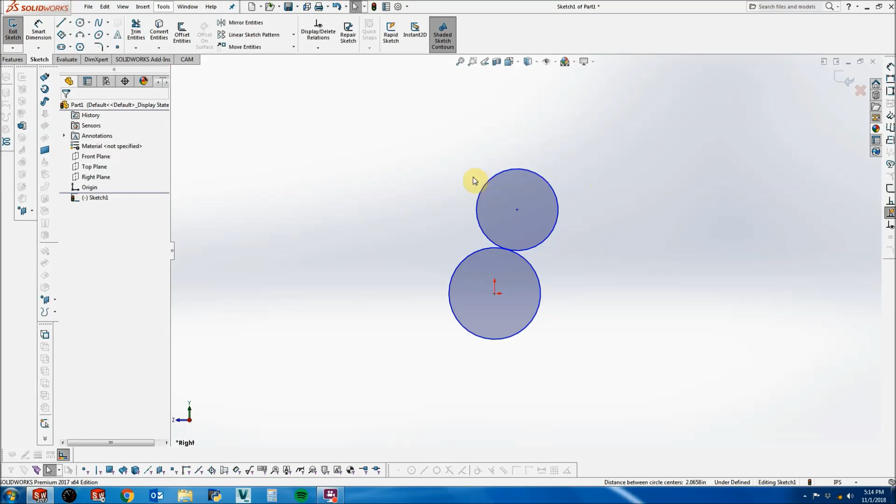Then we're going to have another gear going up against that gear, and to get a reasonable gearbox speed, it's probably going to end up being a 2-speed gearbox. So we'll put another set of gears on there. So this is our output, this is our intermediate, and then this will be the motor.

A typical CIM pinion is 12 teeth and 20 dp. So we'll let this represent the pitch diameter. For a 12 tooth, 20 dp gear, the pitch diameter is going to be 12 divided by 20.

And we'll say this is, let's just say 60 teeth for now. We'll probably end up adjusting stuff. Maybe let's do, I'm entering equations right into SolidWorks, and let's put like 30.

Okay, we want to calculate the gear ratio. Let's just get that right from the start, and let's say we're also using a 4-inch wheel here.

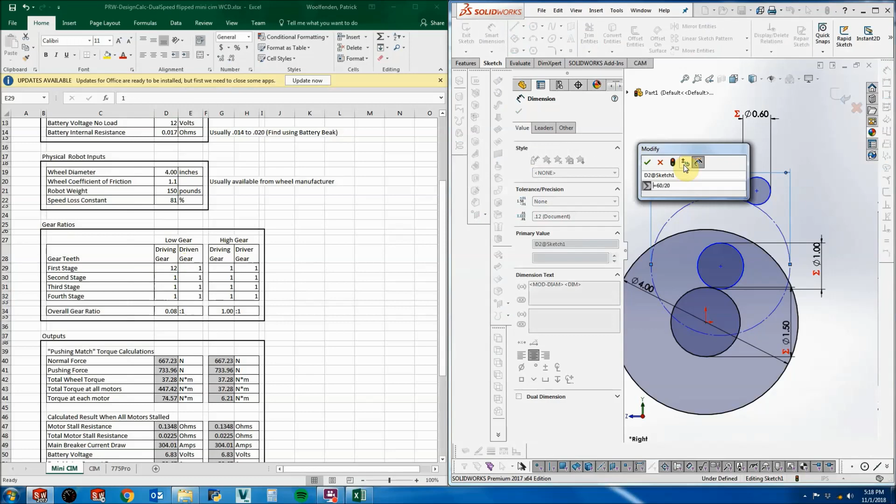Okay, so our driven gear is, let's see. So we said the first one was a 12 tooth, this is 60. I'm going to put these over here in the high gear. This spreadsheet is designed so it can be used for a dual speed gearbox, but you can also use it for a single speed gearbox, just to see multiple ratios that would fit.

So let's try to design it for 14 feet per second. Here we're at 13.59, which is pretty close to 14. Let's say 14 is the max speed we want out of this gearbox, but we also want it to be adjustable down to lower speeds. Okay, so we're kind of close.

I'm just going to do this for consistency purposes. Okay, let's figure out how we're going to put this. We'll let this represent the diameter of the CIM motor.

I want to make this gearbox as compact as possible, so I want the CIMs to actually be overlapping the wheel, kind of on the outside of the robot. So this circle is representing the wheel, this is representing the CIM.

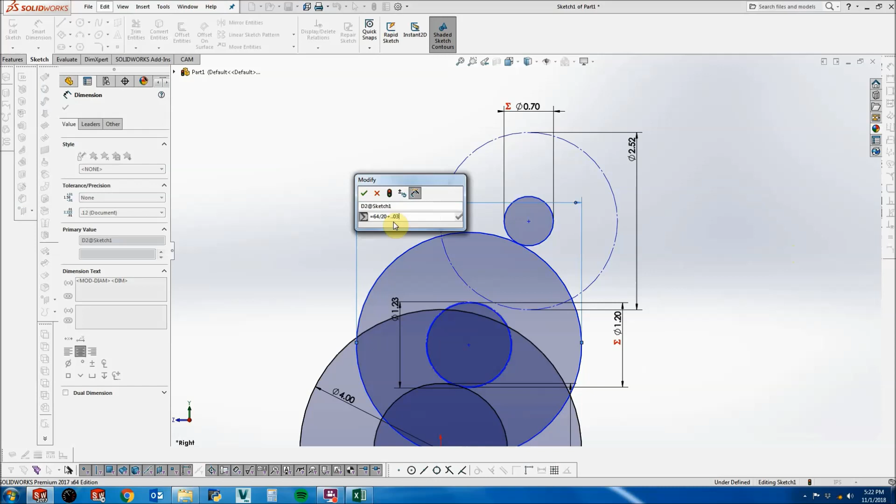Oops, that's not the right one.

So everything's looking reasonable so far, but we're going to have 3 motors per side. It's the same size. Let's say we want these to be the same distance apart, just mostly for aesthetics.

Okay, so now we need to connect these other 2 motors into our gearbox. We're for sure going to need the same size pinion.

Okay, so if that's not nice, let's go like this. That could kind of work. Let's see.

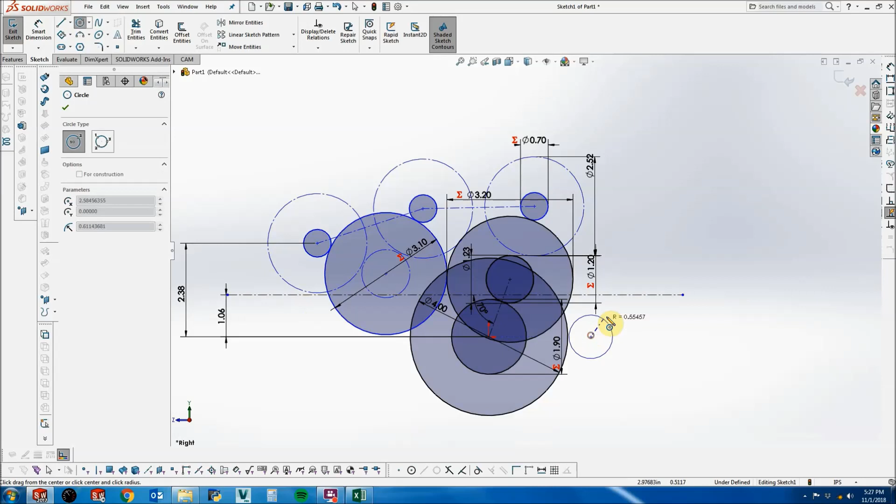So let's figure out where some of these, like the spacers, will go. I'm just sort of sticking them somewhere for now. We'll do like 1/2-inch spacers.

So these bolts are going to go all the way through the frame rail, or one side of the frame rail. Let's do it this way. Seems reasonable.

Okay, so these spacers - so these big gears are essentially outside of the plates of the gearbox, but they're like in towards the middle of the robot. I'll just leave those there for now.

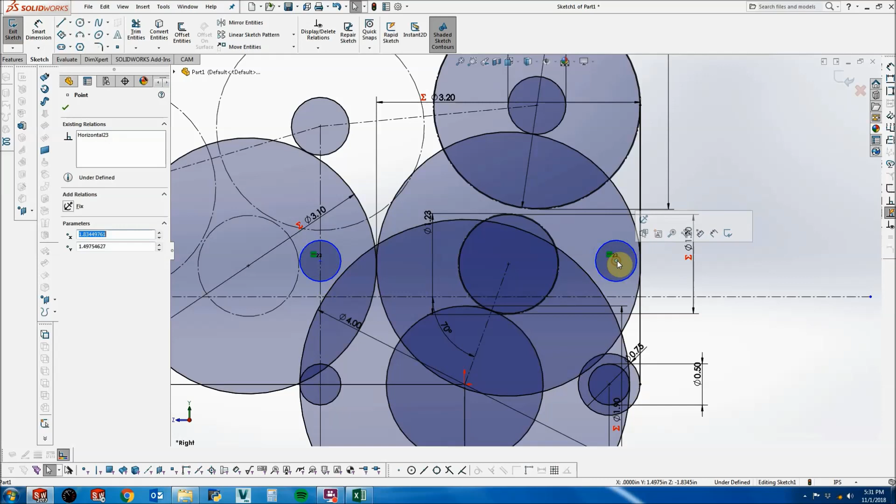Let's make these the same height, just seems like a good thing to do. Let's say, so this is a 1/2 inch spacer. Let's say we want a little bit of clearance around beside it on the edge of our plate.

Then we just need to constrain... I guess let's make these - we just need to sort of pick something to reference them on, so just do that.

Okay, this is decent. I think we'll be happy with that.

So this sketch is just like the layout of where the gears and the motors and stuff are going to be. So I'm not actually going to use this sketch directly, I'm just going to sort of hang out here. So then we'll do another sketch, and this will be our motor plate, the bigger one that gets all the motors and everything mounted.

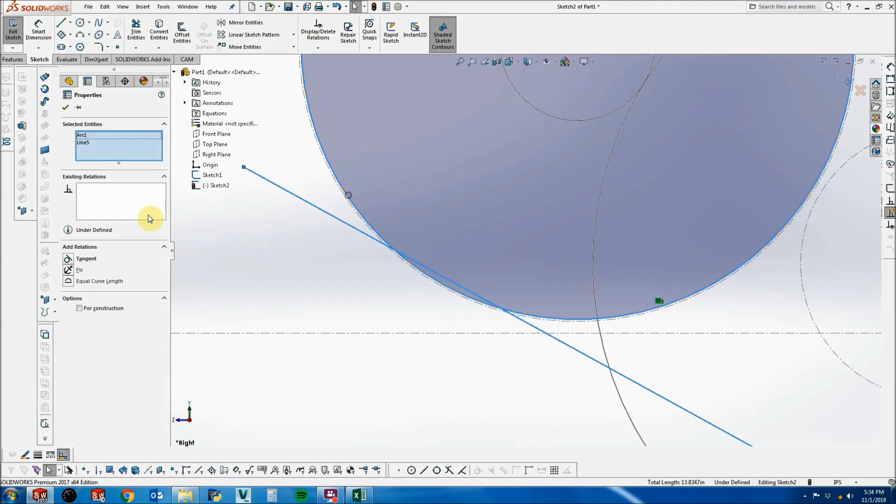Okay, so let's say we want this to be symmetric, just so the bottom of the gearbox kind of looks symmetric. And then, okay. So we'll... this kind of has defined the radius of this circle, but that looks fine.

Okay, so that'll be the outline of our gearbox. So let's make all the holes in it also. So we're gonna have our bearings here. These are all gonna be 1 1/8.

And the holes for our CIM motors up here. Jeez. So these are 0.75 plus a little bit of clearance. And then these - I think these will all be tap drills for 10-32.

Let's put in the holes for our motor mounting screws also. So these lines are just going to help me position those holes. These are all equal to each other. This is 2 inch. These are 10-32s.

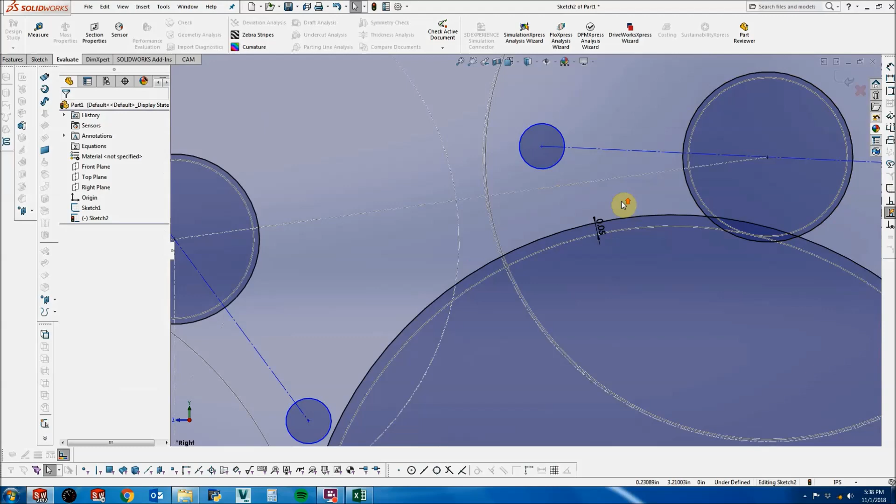And it's less for 20 DP gears. The difference is roughly 50 thou on the radius. So we can just rough that in order to make sure that our screws are not going to be... those are just the clearance holes for the screws. So the actual head, if we use like 10-32 buttons, it's like about 0.36.

That's a tiny bit close. So I'm thinking that once we lighten out this gearbox, we'll probably want a webbing piece between those two. So I'm trying to position that on there. I don't think there's much hope we're going to get this screw between these two gears.

Let's just put this... let's just put that vertical. This one, let's just put it somewhere. Seems reasonable. I don't want these screws to end up randomly in the middle somewhere - I kind of want these screws to end up close to these lines, because when we're lightening it out, it'll just make it a little nicer.

And if they're here, they're also not going to be covered by this gear. There's not really too much hope for this one, so if the middle motor needs to be swapped out, we'll have to remove this gear, but it's okay. Just constrain this guy. So we're going to remove the second motor here, because the screw is not going to fit in. The screw will fit under the gear, it just won't be accessible.

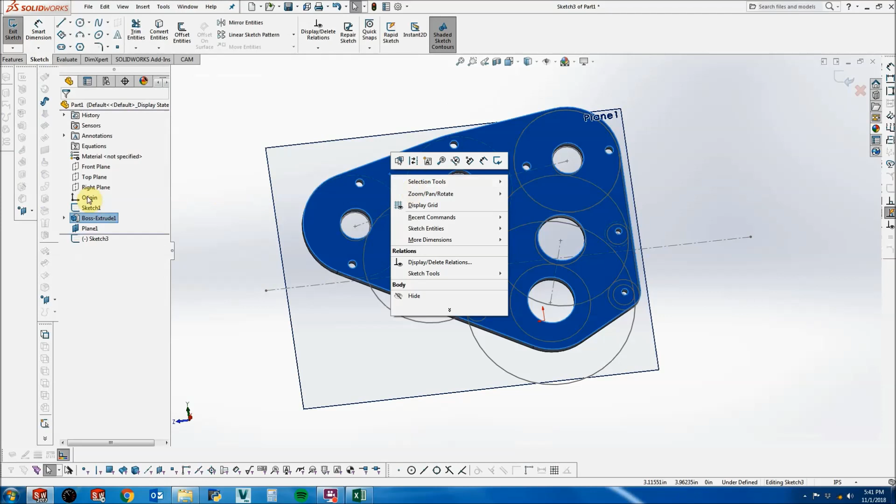So I'm going to space it out a bit. I'm going to sketch on this plane - this is where our second plate's going to be. And then, okay, yeah, so we'll hide this plate for starters, just so we're only seeing our layout sketch, which will end up converting a bunch of entities. Let's look at it all from this direction.

So we're gonna have those gears here, or not gears, bearings. So this is bearing for 1/2 inch hex shaft. These bearings, okay, so I can already tell that we're not going to be able to use the same bearings here, because the motors are going to be going over this plate, and that's the outer diameter of the bearing, so there's not much space left for actual material of the plate to hold the bearing.

So let's make these guys, they're going to have to be smaller outer diameter bearings. So we'll go for like 1/2 inch, or I think we'll use 3/8 hex bearings or something. Sure, 7/8 OD.

Okay, and then we want our webbing material to be 3/16. So 7/8 plus, let's just dimension that directly. 3 divided by 16.

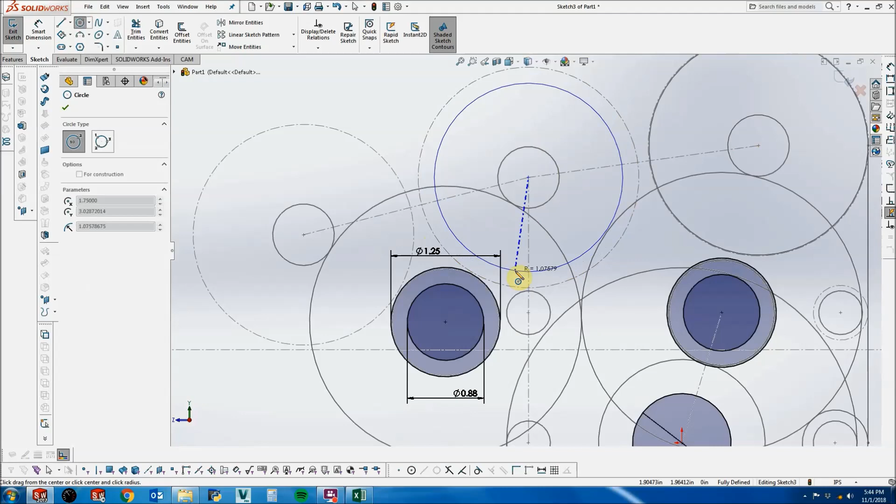It's going to be the same. So this plate needs to avoid this motor here, so we can't just do a straight tangent line between those two bearings. So we'll do that, that's a little bit of clearance, and then we can connect these. Nice.

And then this plate is tying into our spacers. Whoops, not that one, okay. So I am going to show the other plate, or maybe I'll show the sketch for it, so we'll get some things from here too. That's all we needed.

Keep clicking the wrong button instead of the escape button. Nope, one more line up here. Okay.

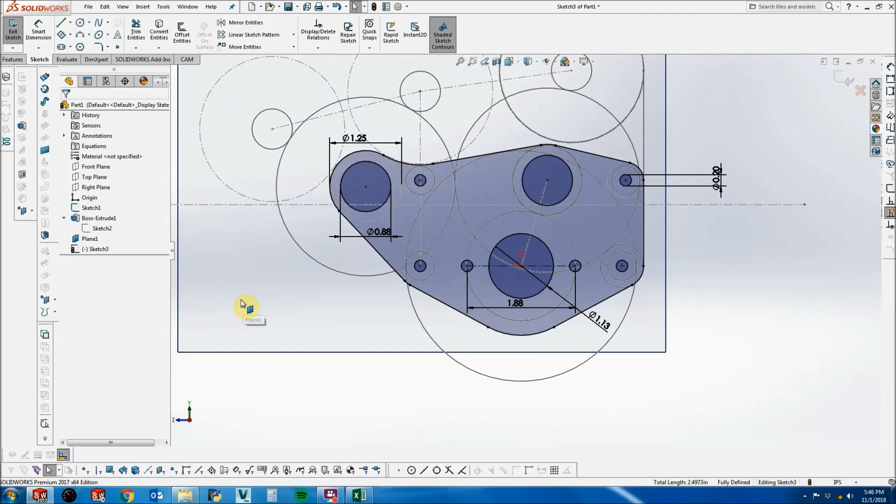Okay, I guess we'll just do this. Construction line, oops, almost. Midpoint. These are also 10-32 clearance. This one's ready to go.

Quarter-inch plate. Okay, so these are our two plates, and we'll lighten them up and make them look awesome later.

But before we do that, we want to be completely sure that the plates are the shape we want, because that stuff's real. Lightening them out is super tedious, and if you're changing them a bunch after you do that, it gets really annoying, because it's more sensitive to broken sketches and stuff.

So we're just going to save this as, let's do flipped mini CIM gearbox plates, and this is going to be our master part.

So now, okay, so we don't want to put this straight in our assembly. This is one part file, but it's actually kind of like two parts. So we're going to do this thing in Solidworks where we can actually save bodies.

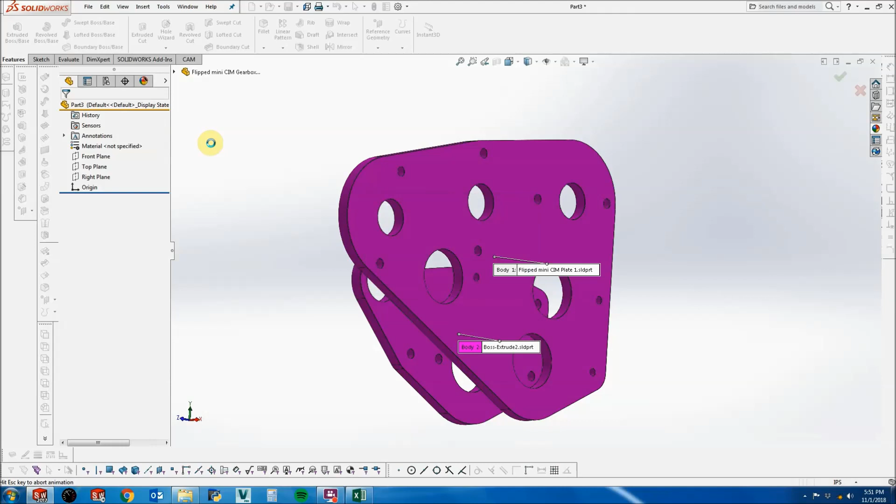Okay, so that's really, so what I just did, so we saved out these two bodies into new parts. So they're gonna like, okay, so this is really cool because these parts are referencing the master part I made. So these parts will be the actual parts that we'll use in our gearbox assembly. But if you go back and modify the master part, these parts will actually update, which is super cool.

So like if I were to, let's just do a quick modification.

Okay, this is sort of just for demonstration purposes. So this is where I save the bodies. If I move that up above where I save the bodies, and then we look at the plate, that's the little one, now it has this. So it did update, which is super cool. Let's get rid of that because we don't want that.

Okay, let's work on our assembly now. New assembly, we'll start by just putting these plates in. Let's get the other one too. Okay, jeez, why is that still there? Just need to save that. There we go, just had to rebuild.

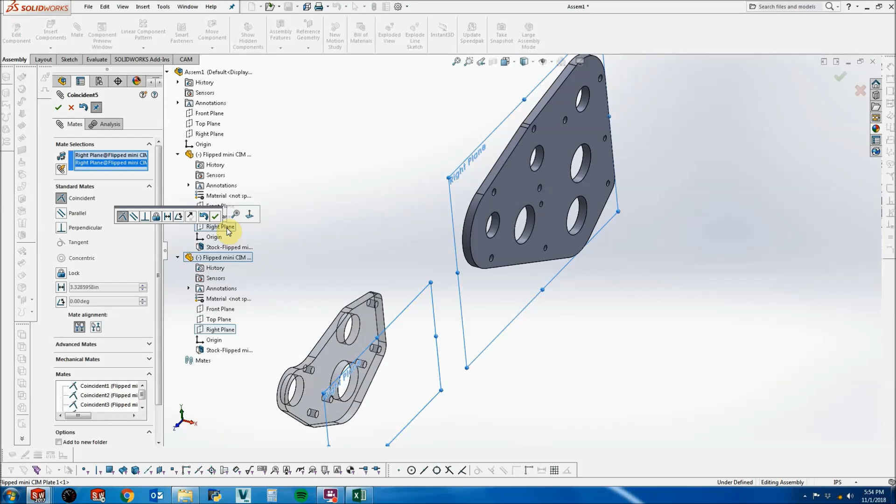So we know we want these two plates the same spacing relative to where they were in the master part, so we can just constrain these together. These are the datum planes for the parts. I'm pretty sure one thing isn't, is that everything? Okay, it looks like we're good actually. Okay, let's save this.

Okay, so let's put some stuff in here. Let's get our motors. Okay, let's... so we're just mating our motors in our assembly. We want that. Okay, let's put the wires near the top. So we'll get these holes here. Then we want our other two motors.

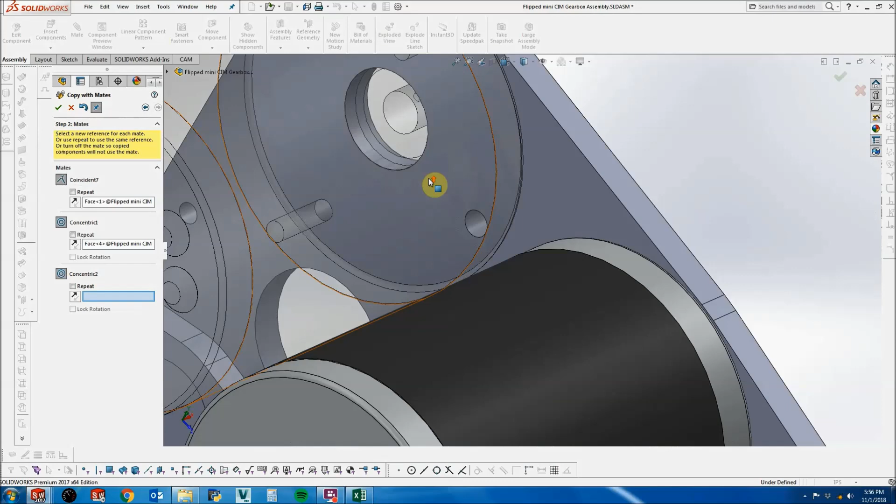Okay, coincident to that, concentric to this. Let's get that. Another one. And we'll do this one, so our wires are mostly at the top. Sweet. Okay, let's get some bearings.

I'm gonna use that copy with mates thing again. So these are our 3/8 inch Thunder Hex bearings. And then now we want our 1/2 inch bearings. Actually, let's wait to do those. Let's do the gears next.

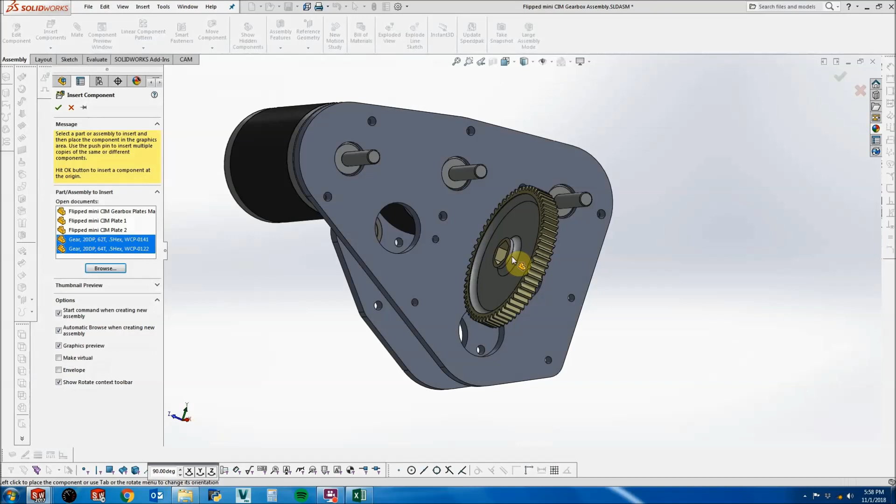Okay, what size? So we said we had this one 62, this one 64, I think. Gears. And we'll use these, we'll use the West Coast Products ones, because they're nice and lightened.

Have you been spacing like the distance between the plates? Okay, so the distance between the plates was set in the master part, and then we just constrained, or mated the datum planes of the plates together. So the master part, did you just add up the widths of the gears, or? I sort of made an educated guess on what I think it would want to be, and then once we stick everything in there, we'll see how close we were and adjust as needed. Right, yes, you can definitely adjust it.

Oh, so it's like a rough sketch and your idea of how far you think it's gonna be apart, and then we can adjust. Yeah, because that's not something we're gonna lay out in our layout sketch, because it's kind of in a different direction. Okay, our 64 tooth we said is here.

This one's the 62. Sweet, and we'll just do that for now, make them. It's about where those are gonna go. They look like they're meshing correctly. They moved again, okay.

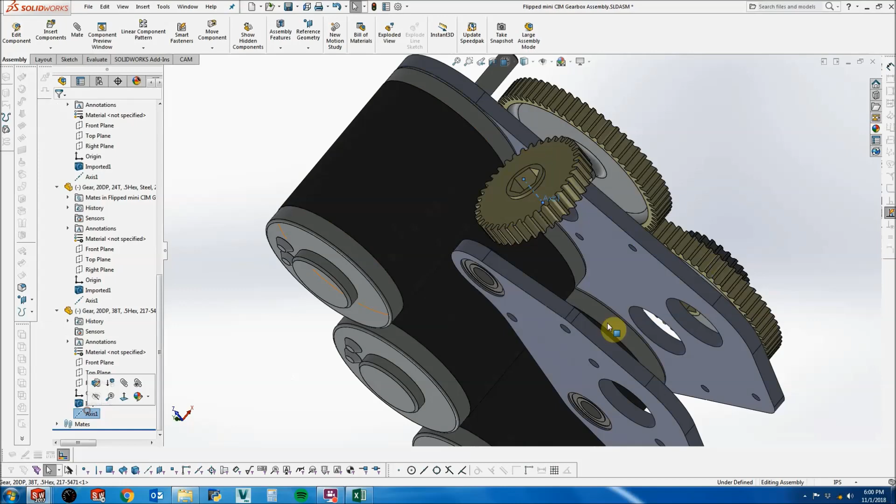I like to put axes on these gears so they're easy to mate to stuff. How do you make the gears mesh together? Does it just do that for you? No, there are ways to make it do that, but I honestly don't usually bother making it look like they're meshing perfectly. You definitely want your center to center distance to be correct, but I don't really bother making my gears look like they're meshing or making my hex shaft holes line up all together on the same shaft and stuff like that.

As long as the distance is correct you still have to do that? Yeah, I mean you're not going to be able to tell if the distance is exactly right by looking at how they're meshing. You're going to want to do the calculation to get the distance right. So is the diameter measured from like the part of the teeth? So the pitch diameter is kind of like sort of through the middle of the teeth. Oh, I meant the overall diameter. Does it count teeth?

Yeah, it does. Okay, and so then if it's 2 gears, if there's 2 gears, the overall diameter is like intersecting each other, like a Venn diagram or something. But the pitch diameter is for like tangent, and that's what you use to space the gears.

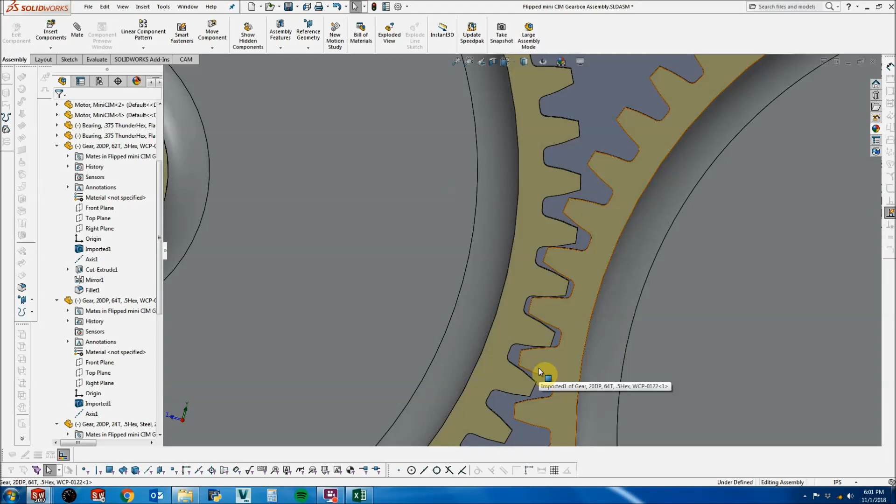So in the layout you created just a circle without any gear? Yeah, you just made them tangent to each other, so that's the pitch diameter. And the pitch diameter is calculated by the teeth divided by the diametrical pitch, which is 20 for these gears. So the actual thing looked like a Venn diagram, like you said, like the outer part. We'll just do it for fun.

So the outer dimensions of these gears are going to, let's see if this works. So they're intersecting, right? Yeah, but the pitch diameters - this one is 64 divided by 20, this one is 62 divided by 20. I got that wrong. Okay, so these are basically tangent. The reason why they're not tangent is because we added that extra 3 thousandths to make them not too tight. So there it is.

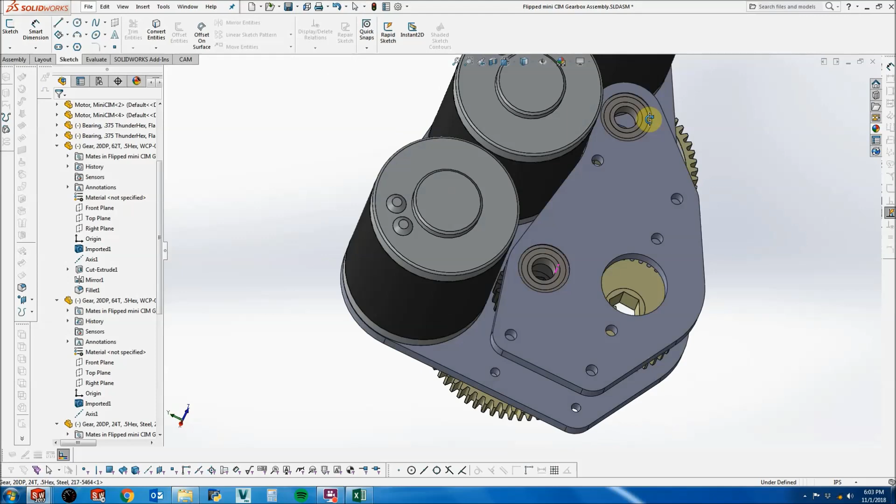Okay, we don't want to keep that sketch. So we got these guys in, and since we double checked, that's clearing. That's good.

Okay, so this is looking pretty nice. So there will be a shaft that goes through there and supports that. So I'm sort of trying to think ahead, like how are these shafts and gears and stuff gonna stay on and be captured? Yeah, John?

What you could do is tap into the end of the Thunder Hex and then put a bolt with a washer on the end to keep the gears on. Yeah, I think we'll do that for these gears, because that's easier for us than trying to use retaining rings or clips or something.

But then, so that'll keep the gear from falling off, but the shaft also needs to be able to stay, to not like - what keeps the shaft from going out of the gearbox? So...

Okay, I think I know what I'm gonna do, but let's put in the other bearings now. And let's use - I'm gonna use 1/2 inch Thunder Hex bearings actually, instead of the normal hex bearings.

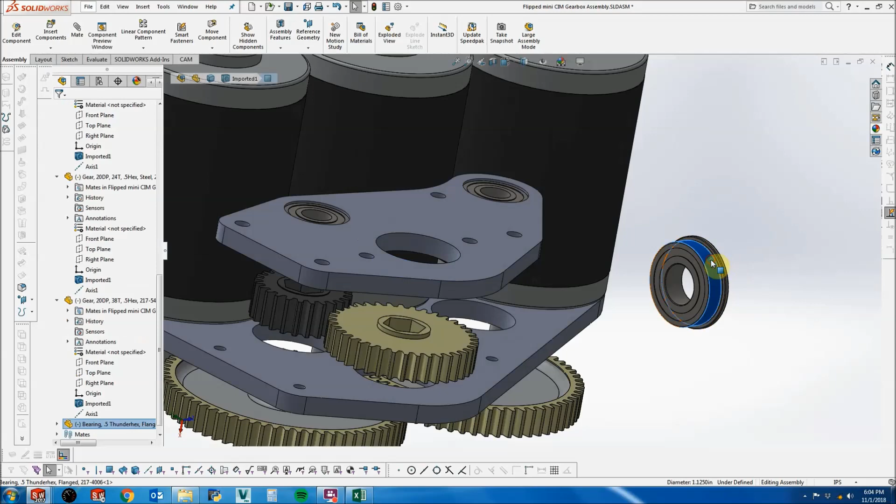Oh okay, jeez. I'm gonna - let's see. No, we don't actually want a bearing in that hole. Actually, I don't want that either. I want this to point the other way. Okay.

Yeah, we'll go like that. And since we checked, they're not touching. We already knew that was going to happen because we made sure in our layout sketch. I keep doing that, but I like to do this actually - copy with mates. Yes, it's a little bit faster. Okay.

So these shafts - just yet, because let's make sure that we have the spacing of these plates correct before we do the shafts, because that's going to be important for the shafts.

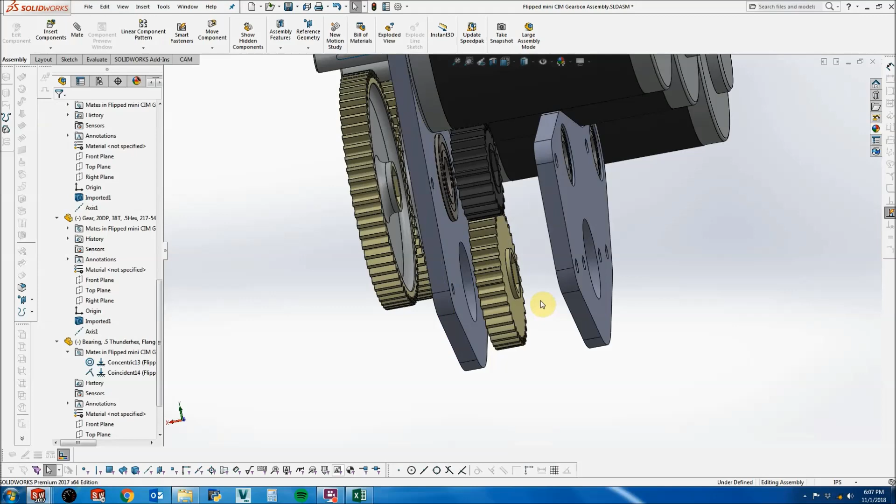Patrick? Yeah, you know the bearings, the holes that you put the bearings in - you put a little bit of space between the bearings and the holes, or is it just perfectly tangent so it fits perfectly? So I've just modeled them the exact size. You could do, as long as it's pretty close, it can't be too much undersized. If it's more than half a thou undersized, they're going to be really hard to get in, and they'll actually get squeezed and won't work very well. But then you don't want them to be too loose either.

So what's the clearance you use on them? If you want it to just slide in easily, it'll be maybe 1/1000th of an inch, but not be sloppy. But really, you're gonna have to dial it in with however you're manufacturing the parts.

Okay, so this section here - our frame rail is gonna go here. Our 2 sprockets for our West Coast drive chain are going to go there. So let's put those guys in.

We'll use these VEXpro 18-tooth sprockets. Yeah, let's mate these together. Let me do it this way. Oops, that's not the right button.

Yeah, John. Why not use a double tooth sprocket, like one that essentially is just one part but two sprockets? Because I want to use 25 sprocket - they just don't make them for 25, I don't think Vexpro does. If you were using number 35 chain, would you? Yeah, probably, I think so. If it fits better, I would.

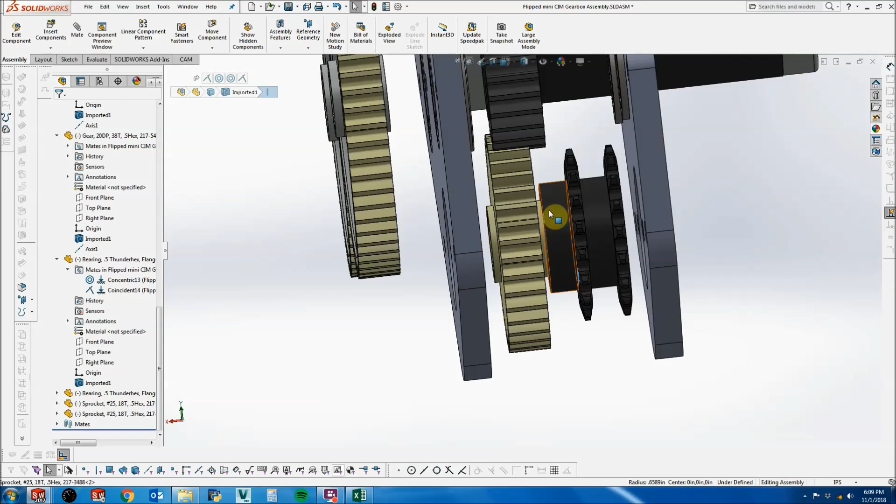Okay, so that's actually looking reasonable. Looks like we got that spacing on our plates pretty close.

Let's put in these bottom bearings. We'll use Thunder Hex bearings again. Flip that - I want the flange on the other side. Okay, let's put in that West Coast Products thing.

So this part goes through the 2x1, and then you can put a bearing in here, and it holds this bearing nice and out close to the wheel. And it's like a COTS part.

We just want to use as few custom parts as possible, so that it's easier for us to make it.

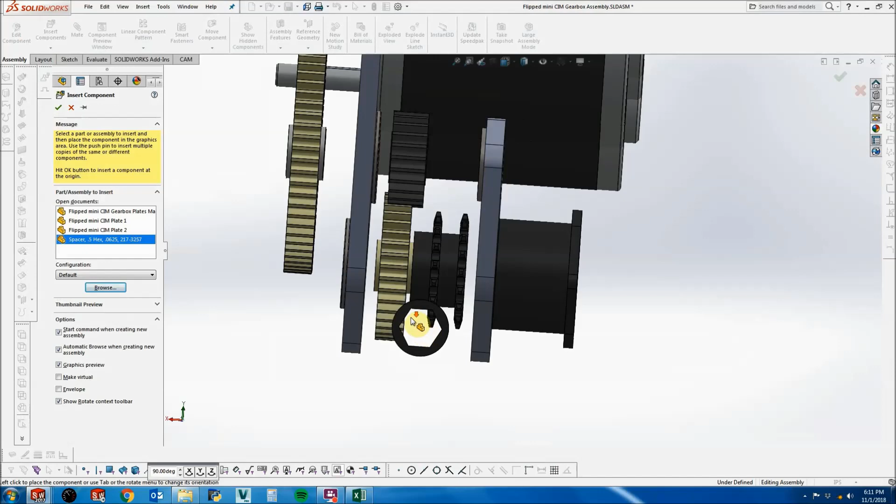Okay, let's put in some spacers. Hardware spacers. Put in a 16th inch spacer in order to get these gears to line up, because the bearing flange is on the different sides.

That's wonderful. It's hard to see it. I guess I could do this. Boom, there we go.

And then what's our spacer situation here? I like how far these sprockets are from this plate, so that's nice. So what do we need in here? Like 1 1/4. So we'll get this 1 inch one and a 1/4 inch one.

Yeah, they're not showing because they're cross section.

I kind of like to mate this stuff back to some sort of fundamental-ish part of the assembly, so that... oh, that was weird. Okay.

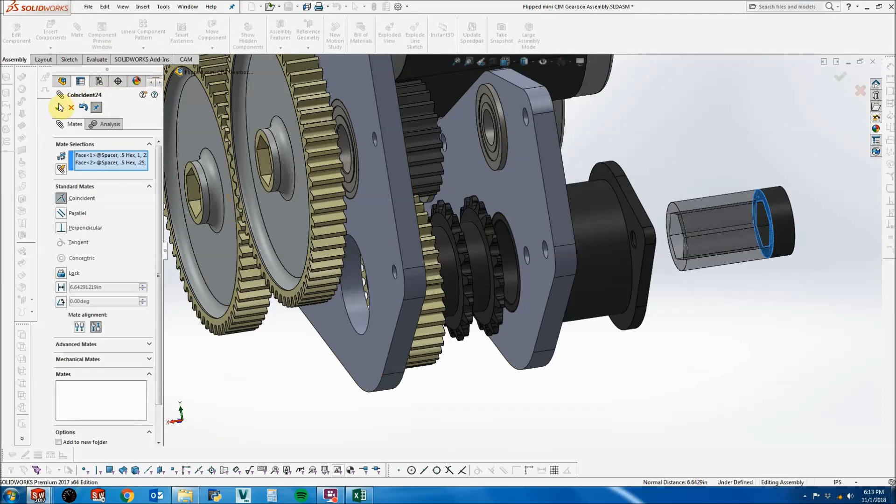Cool. And then this gear, it's just going to be straight up on there.

Okay, so this gear we're going to need some spacers to keep it in the correct spot. Looks like 7/8 inches of spacers, so that's going to be 1/8 plus half plus a quarter.

Lots of spacers. What are the sprockets for? The sprockets are gonna be what drive, so chains are gonna go on the sprockets, and then those are gonna go to the other two wheels of the drivetrain. And then one of the wheels is gonna be driven by the shaft, straight up on the output shaft.

I don't know if this is a big question or not, but why do we have 3 mini CIMs? They're mini CIMs, and it's like the hot thing to do now, is the 3 mini CIMs.

So if you have 3, is it like... So normally you use 2 CIM motors per side. The mini CIMs aren't as powerful as the CIMs, and 3 mini CIMs turns out to work pretty well. It just drives the wheels.

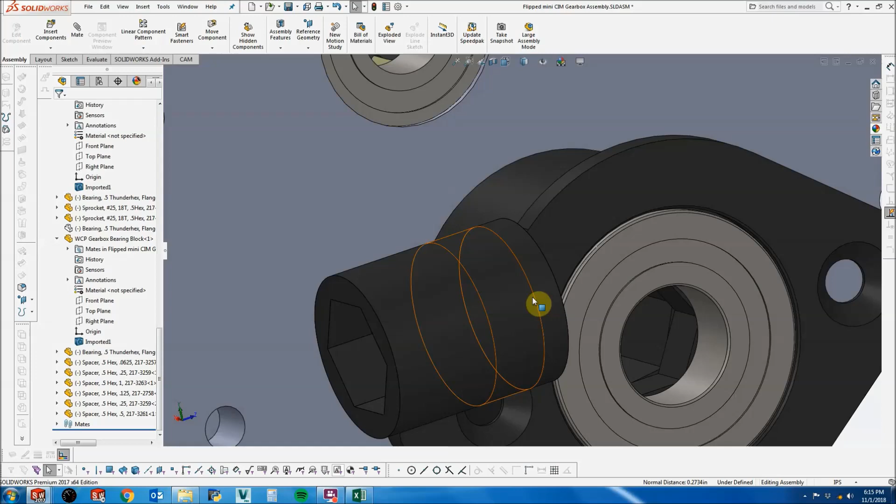So we need 2, we need 3 of those. Yeah, it's a mini CIM. You don't need 3, but 3 turns out to work pretty well. Like with 3 normal CIM motors, you're getting to the point of diminishing returns on your battery current draw. It's debatable how helpful the third one is, but...

So what are you saying? Like when you did the gearing calculations in the spreadsheet, those were included, right? Okay, so we'll go off on a tangent a little bit on the spreadsheet.

So this spreadsheet is my own spreadsheet, which is designed, unlike the JVN calculator, to take into account the voltage drop on your battery, because you can't just keep adding motors and getting more and more powerful. Your battery pretty quickly becomes the limiting factor.

When you stall a bunch of motors, the battery voltage drops, which makes the motors able to output less torque. So this spreadsheet just sort of linearly scales the output, the stall torque, back based on the voltage.

So in order to know how much the voltage is going to drop, you've got to know the internal resistance of the battery, and the battery can measure this. We typically have 17 milliohms. Anything greater than that, we won't use that battery in competition.

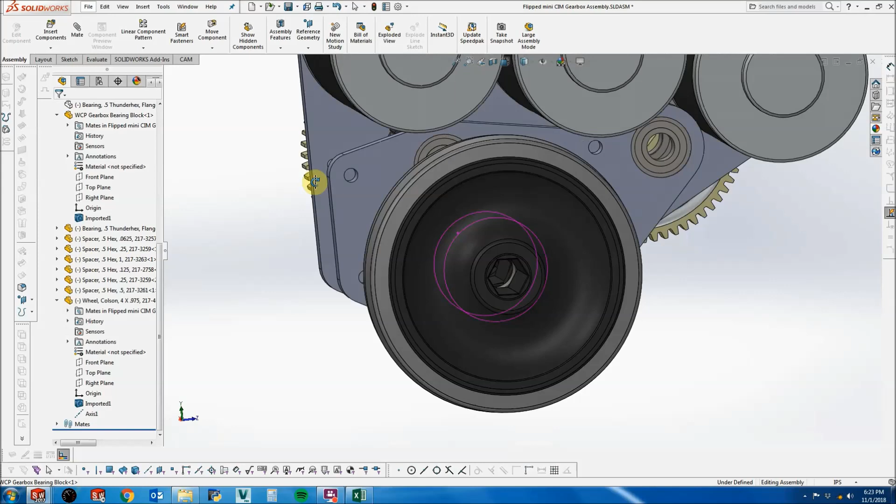So we have good clearance between our wheel and our motors, but we're overlapping so that this gearbox is really not very wide. Just what this gearbox is trying to be.

And I'm gonna, so from here, we'll do the hex shaft first. 4.263, I'm looking at it down here. We have a starter part for hex shaft.

And let's save this as Flipped mini CIM output shaft. Okay, I forgot how long to make this.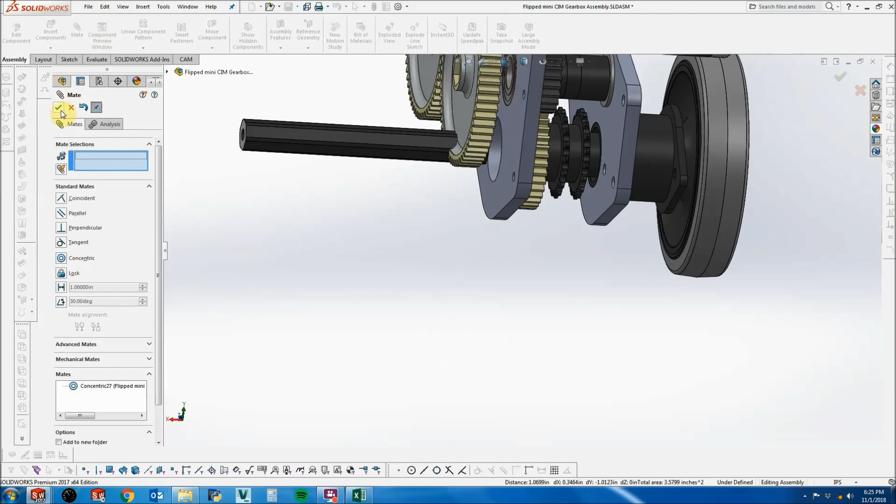Going from here to here. 4.27, let's do. Okay. Do this again. Oops. Okay, let's fix that. Cool.

And we'll put in our washers. Sweet. I'm just gonna do this. Yep. Okay. Uh-oh. That ended up wrong. There we go. Okay, yes.

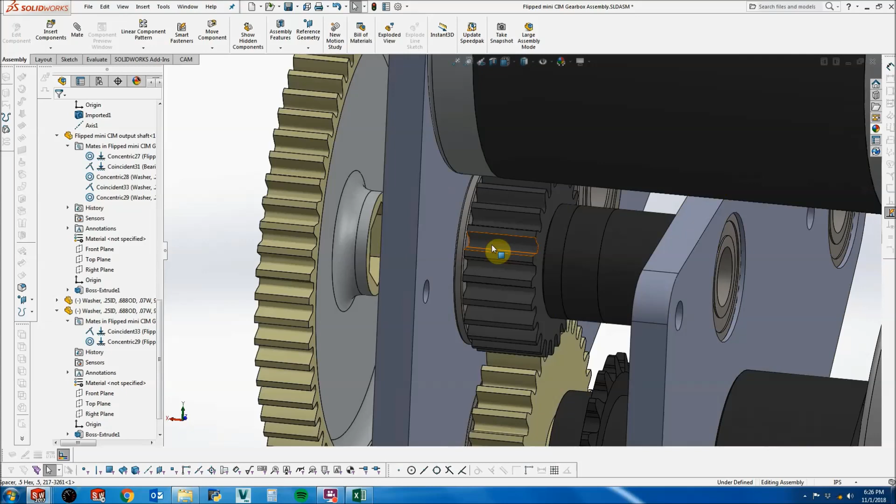Okay, let's do our other shafts. So we already need a bunch of spacers on this shaft. I'm thinking of what's going to hold this shaft in. We've got a bunch of spacers on it already to keep the gear in the right spot, and we're going to have a screw and a washer to hold this gear on. But there's nothing that's going to prevent the Thunder Hex shaft from sliding out in the direction towards the gear. So you could put another washer and bolt on the back here.

You'd want to make sure it clears the frame rail, which we don't have modeled right now. But I'm not gonna do that. I'm gonna start with a half inch hex shaft, then turn it down to Thunder Hex for this Thunder Hex bearing, and that sort of step is gonna keep the shaft captured.

Okay, so let's first start by sketching a... we're just gonna make it a number for starters. Where did it go? Part 5. We'll just save it as something. Flipped mini CIM. Intermediate shaft.

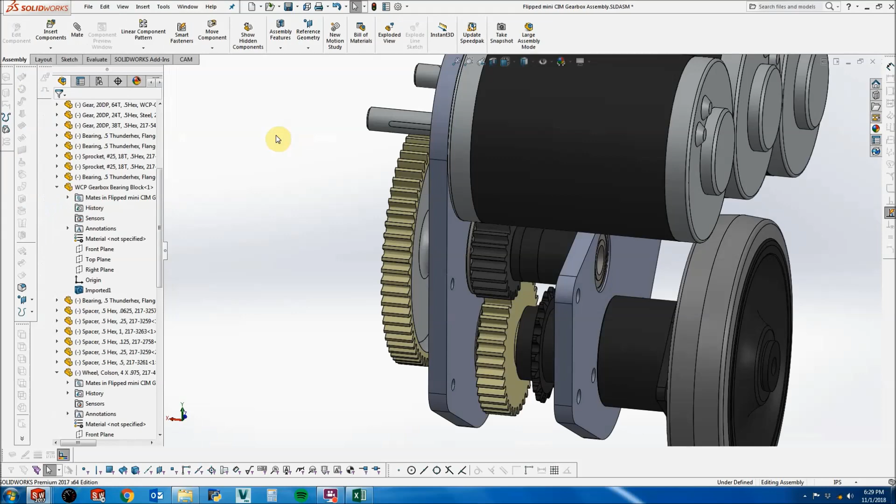Since I'm gonna just put an axis through this so it's easy to mate to stuff, and I kinda wanna mate it straight to this part. Okay, so how long does this shaft need to be? So that is 1/32 off of that plate. That's 2 inches. So 2 minus 1/32.

This is, let's put a 1/4 inch spacer. And that's a 1/2 inch gear, so... so 2.75 minus 1 divided by 32. Okay.

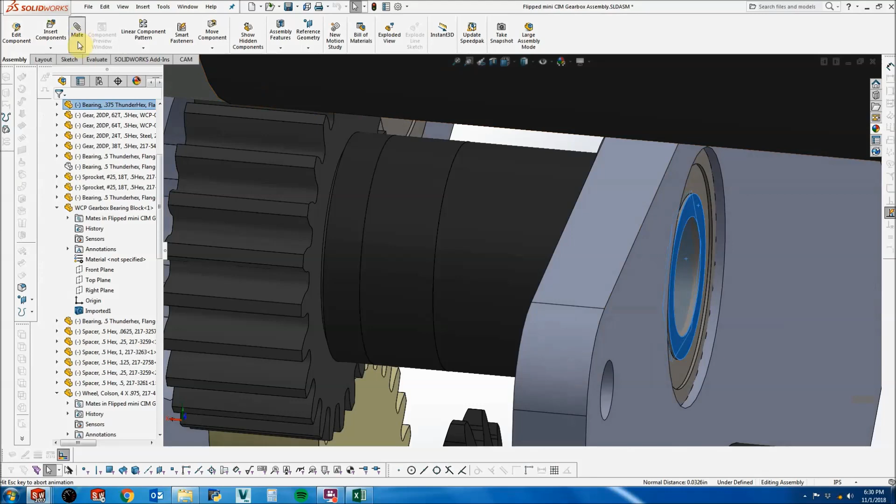And then, so I'm actually going to edit it in context, in the assembly, so we know we're putting the right things on the right side of the shaft. Edit that, let's also isolate it.

3/8 inch Thunder Hex, so 12.25 millimeter. No, that doesn't seem right. 10.25. I think that's it. Isn't it just supposed to be 3/8 of an inch? It could be if we used a 3/8 inch bearing, which we totally could have done. But I chose to use the 3/8 inch Thunder Hex bearing. So it's not.

And then cut extrude, we're gonna flip that. So this is gonna be 0.25 minus 1 divided by 32 plus the flange, which is a 1/16. So that should be the right number.

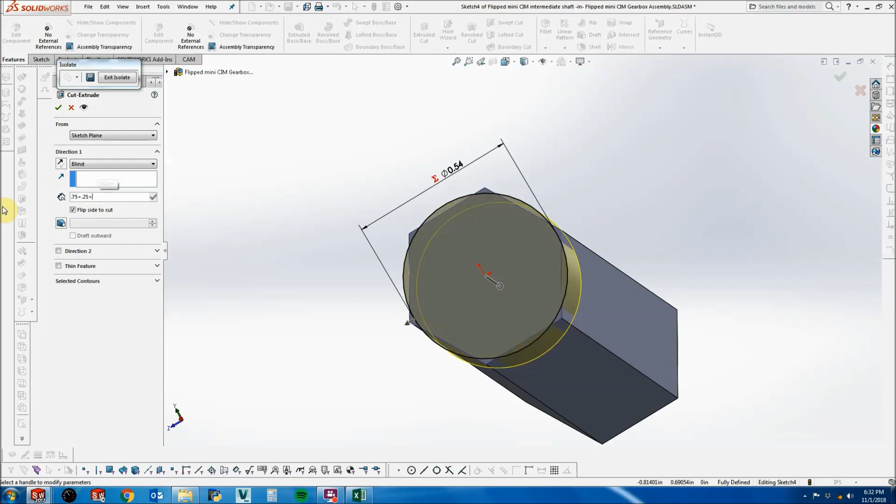Okay, then this other side should be easier. So we're turning this into 1/2 inch Thunder Hex, which is going to be 13.75 millimeters. I'm gonna cut that. Okay, so this is 0.75 plus 1/4 plus 1/16. Let's see if we got that right.

Where's that bearing? I think that's right. Patrick, how is that shaft gonna stay on there? Are we gonna tap the end and put a screw in there? So we're gonna tap this end to hold the gear on. But then this other end is, so that's just what we just did.

So this other end is going to be, there's these little tiny steps where it changes from hex to Thunder Hex. This is kind of like a trick that I think is underutilized, but it's nice because it saves us from having a screw over here, and also when you take that screw off and remove the gear, the shaft is still captured. And luckily we can use the same exact shaft on this guy too, and it prevents us from needing a bunch of spacers in the middle, which is quite nice.

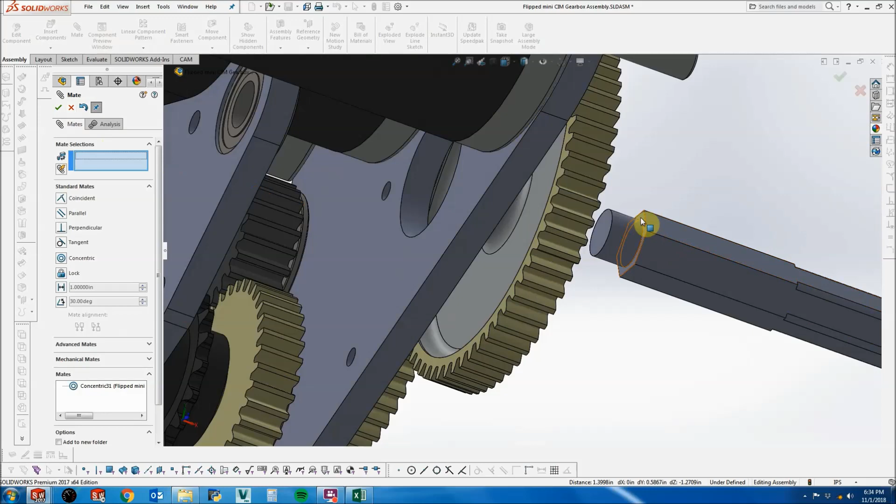That shaft, do we have to manufacture ourselves? So we'll make it, yeah, we will, and we'll make it out of 1/2 inch hex shaft, and luckily the things we're doing to it are pretty easy to do on the lathe.

Alright, one last thing the shaft needs though is a hole, because the 1/2 inch hex shaft does not come with a hole in it like... okay, yeah, that's already right. Like the Thunder Hex does. Seems reasonable. Yes. Sweet.

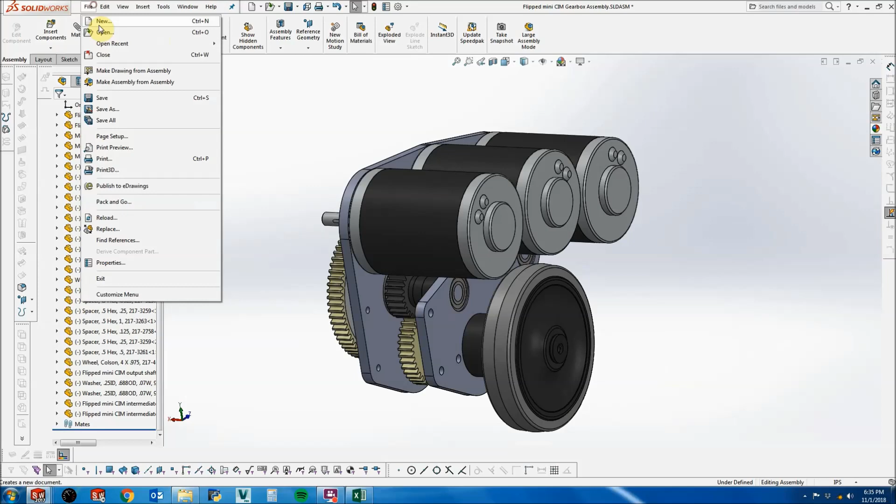Okay, we have our shafts. So everything's seeming pretty reasonable, so at this point we could start pocketing out our plates. But we definitely want to make sure we're pretty happy. Let's model in the frame rail a little bit just to make sure that we're not running into any issues before we start pocketing our plates.

Yeah, that's not really what I wanted. Let's go right plane. So 2 inches tall. We'll say this is like the center dropped gearbox by 1/16. I think this is 375 — I think that's what the West Coast Products thing is.

10-32 clearance. 7/8. Okay. This is just an arbitrary number. And then our other holes were 1.75 from the center, I believe. #10-32 clearance as well.

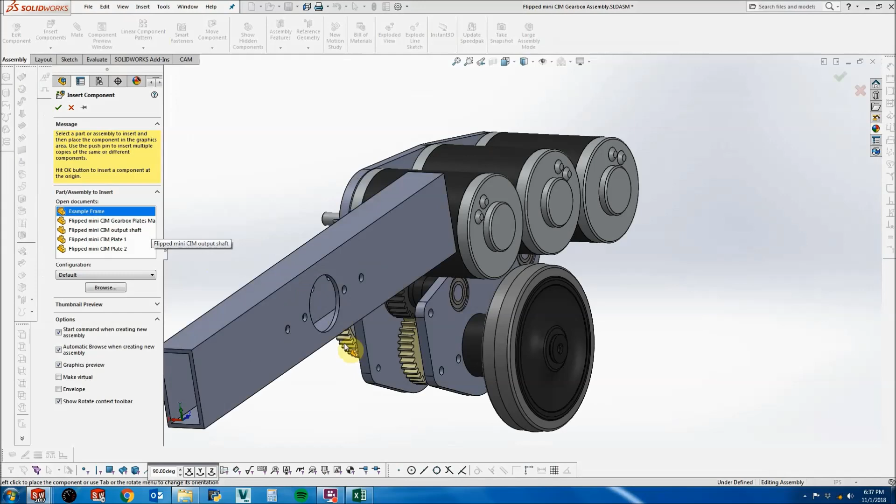Okay, frame example. We'll just do that. And we need to prevent it from swinging around, so...

Sweet, okay, so we're clearing our motor. That thing looks fine. It looks like there is space between our, like, the chain, where our belly pan could go fully underneath this, or where the chain is gonna want to go, which is good. So it's looking pretty reasonable.

Patrick? So the chain is gonna drive the other 2 wheels, right? That's right. So which way are the wheels gonna be placed behind? Well, either you do 2 on this side, because this gearbox, you usually want the wheels all the way out in the corners. Or this could be the middle wheel, and then you can do 1 on either side.

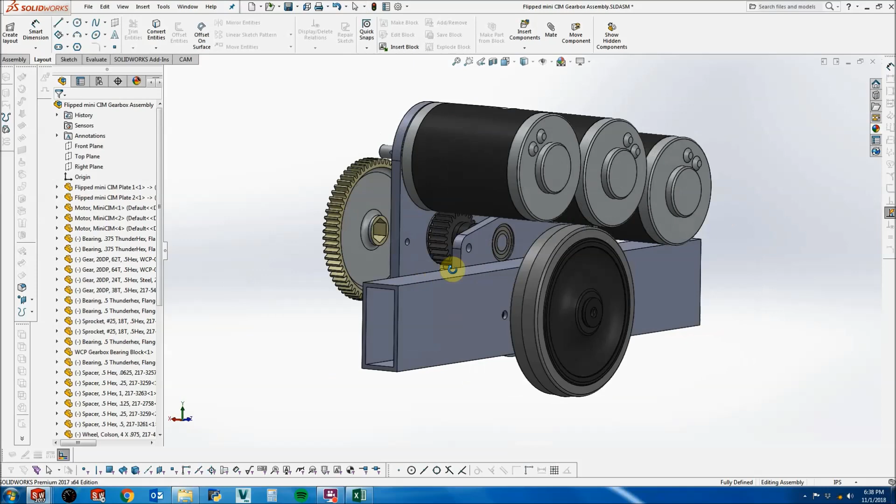Let's get those spacers in real quick. Hardware spacers, these are—is it 1/4 inch?

So particular about mating to that plate. It's gonna be difficult. Oh no. Got it. Okay.

Alright, we'll put those washers and stuff on later. Let's get to the fun part.

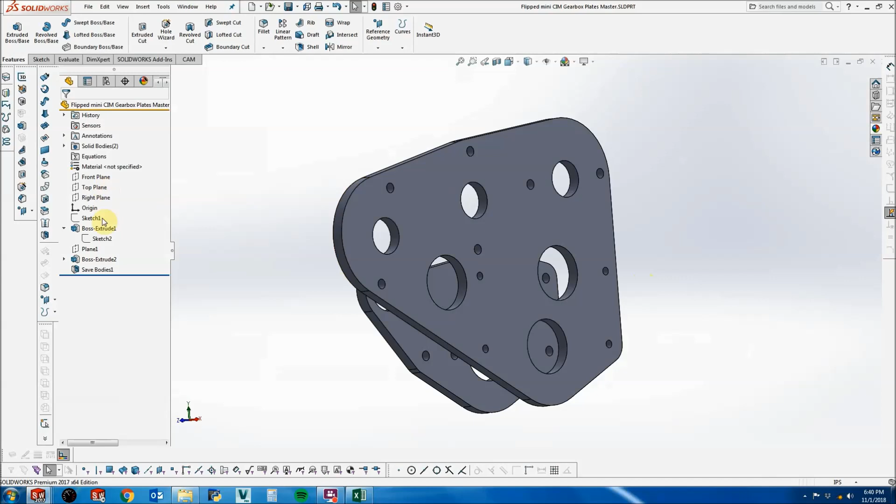Okay, so let's do these, and we're gonna still modify these in the master gearbox part plate thing. If we do it here, does it change for everything else? Yep, it'll propagate through. Yes.

What about from the mini CIM shafts onto the bigger gear? So those do need gears. You're saying it's missing the pinion gears? So you'll put those on later? Yeah, I'll put those on later. I can already tell they're not going to cause us any issues.

Okay, we can put them on now. I'm eager to get started on the part that makes it look cool. Okay.

That's very tedious. Okay, we'll... Don't they need spacers? We'll use those retaining ring things. Okay, it's gonna do it this way.

Yay. Okay, so those are meshing properly. Now I think it's definitely safe to start on our weight reduction stuff.

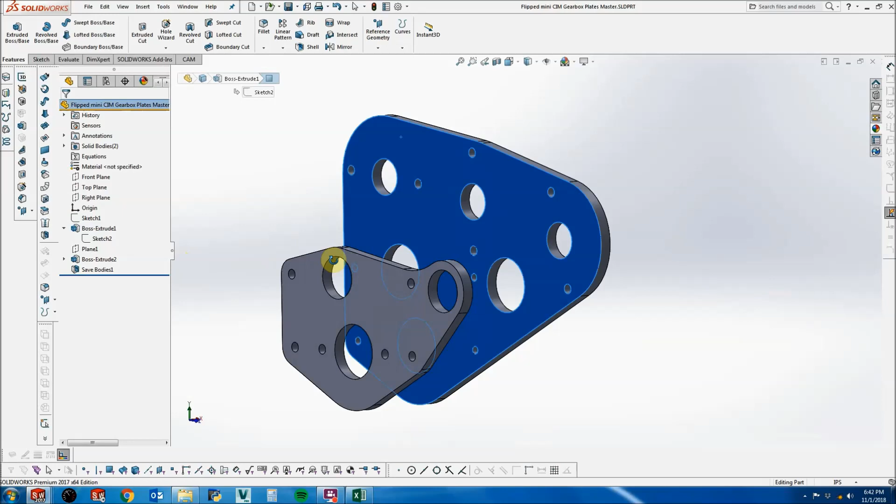Okay, so let's just hide this. We'll start with that guy. I don't know, I want to do it from this direction, but...

Okay, so the first thing we'll do is offset the perimeter, and we said we're doing 3/16 inch. And then let's define where all our connecting things will be.

Well, okay, we'll save that one for later. It's good to start by going through where the gears are actually applying the force, so to speak, I guess. Let's just show that so we can snap to some stuff.

So that's gonna go to there. This gear is connecting to that gear. That's going to there. Click and drag. Yeah, I know I can do that.

Okay, there we go. Let's do this one too. We'll do one straight across here. We're gonna end up doing more. Let's do...

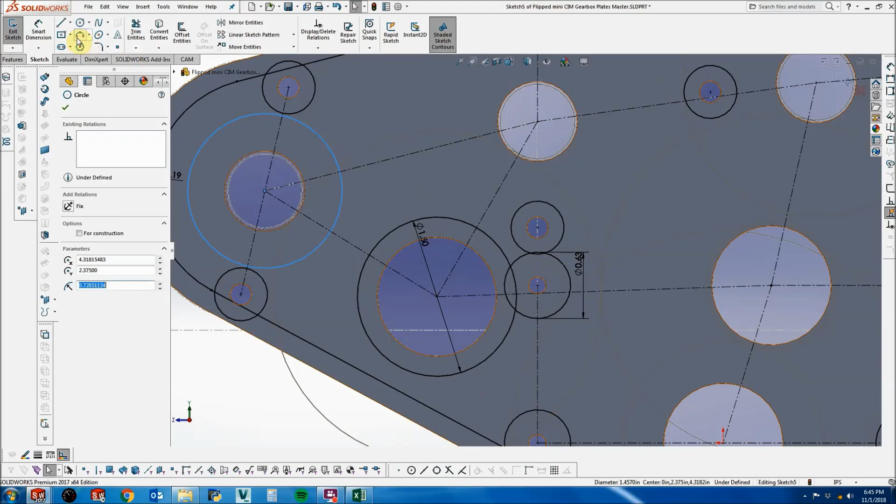So this is 1.5, and then 0.75—jeez. Okay. 0.75 plus 3/8 is 1 1/8. Okay, I don't know why I did that.

Equal, and we're—yeah, dimension only one of these. 1 1/4—no, 1 1/8. Here we go.

Don't know why I didn't do these ones earlier, because it's going to be the same as that one. Okay, let's throw another one from here to here.

Do one down here. What are those lines for? Those lines are showing where we're gonna leave material to connect all our bolts stuff together. Do one up that way, and let's do one more for here.

Why did we use such a big amount for that little hole in the center? Which hole? Like that, this one? Yeah. How come they had to have such a much larger amount? Well, there's gonna be a 1/2 inch diameter spacer on those. Oh, okay.

And you want it like 3/8 or whatever larger than that thing? I'm having it like a 1/8 bigger, which will be like a 1/16 on the radius. It just makes it so it's not looking like it's supposed to line up perfectly and not lining up. But when you have the spacer on there, it'll look like 1/8 larger than it? It'll, yeah. Okay, I don't know. You don't have to do that, but that's how I'm gonna do it.

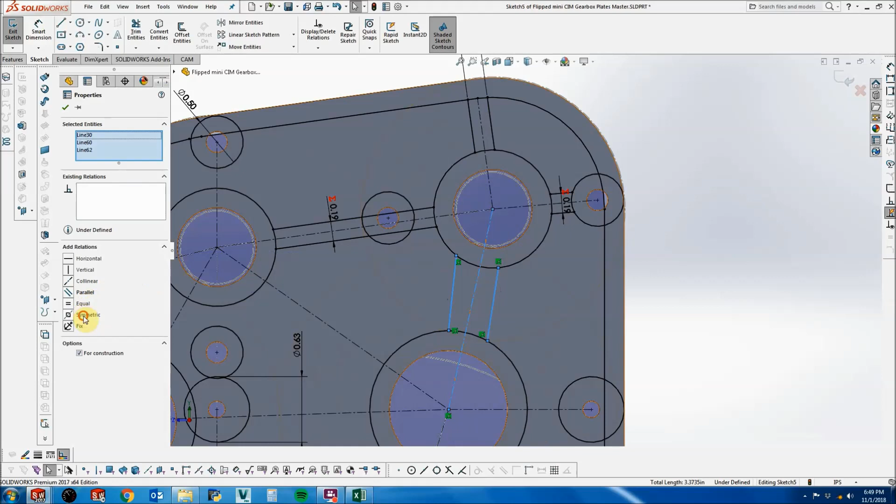I guess we're gonna need that a lot. I just copy pasted it. Purposely not making those horizontal in case we ever change this line off horizontal. I could just copy and paste that so I don't need to keep clicking on it.

One thing I've tried while doing this is offsetting all of the construction lines to both sides, and making those lines for construction, because then I just have a ton of guidelines, and I just have to match the points with a bunch of arcs. That's interesting, and that works pretty well. I think it's the best way I've found so far. Other than that, it's basically just making parallel and symmetric, and then dimension.

Yeah, I kind of don't want... we're going to end up with this weird thing over here. Oh, jeez, I didn't want that to come to. And of course that was the one that I had dimensioned. Alright.

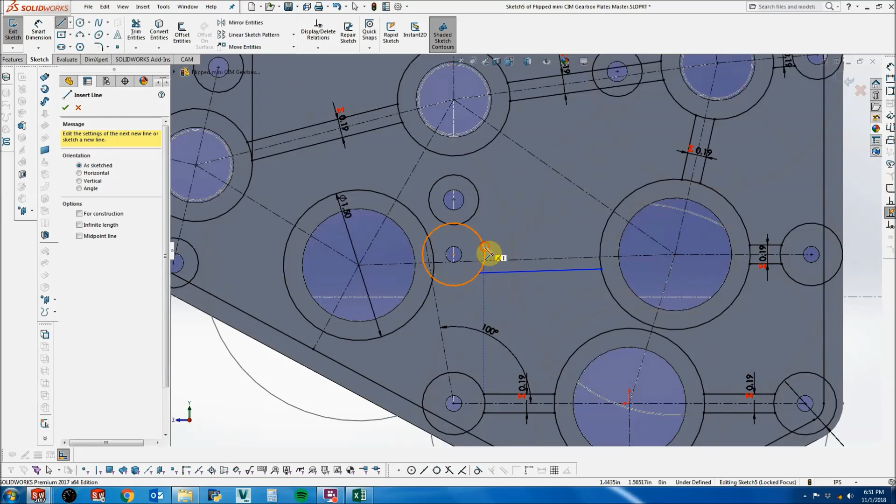This is gonna be fun right over here. Okay, deal with this area later. Jeez, that seems to keep happening. That definitely got something I didn't want it to.

Dimension. Get both of these at the same time.

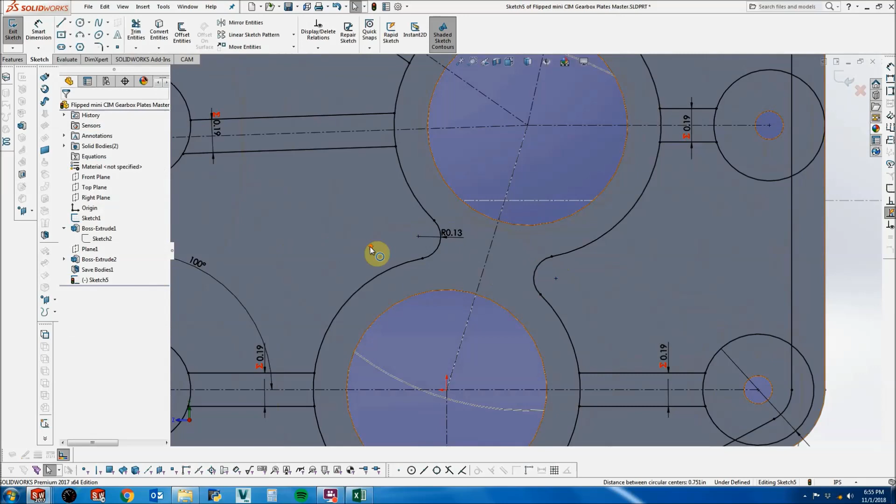Cool, wow, okay, let's figure out this situation. I think I'll see if it fits between that circle and the closest one first, make these parallel. I kind of don't like this huge chunk of material that's gonna end up here. Let's just make this collinear with that to reduce the great mess of material that's gonna end up there.

And I think this is gonna be... oops. I keep hitting F1 when I'm going for escape.

Okay, so that actually got that right. I'm gonna save as much to put in feature fillets as possible. Okay, now we start trimming.

Oh, it was on the midpoint. Okay, well, that's fine, it's still vertical. Oh, I clicked on the wrong thing. Okay, apparently this was not actually on there. Now it is.

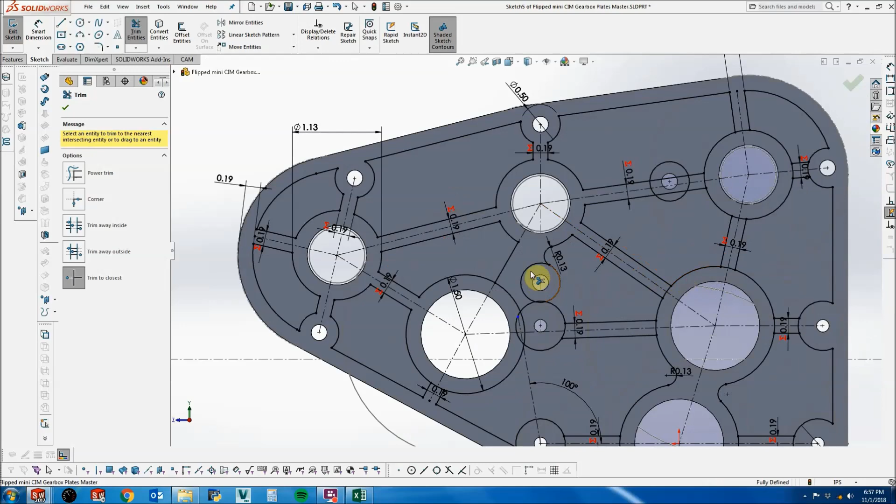Got all that. Leave these guys. No. But I do have a big clump of material there, that's okay. Pull it right through.

I think we're getting close. Is that it? Nope. Why is it? I feel like something's not quite done yet.

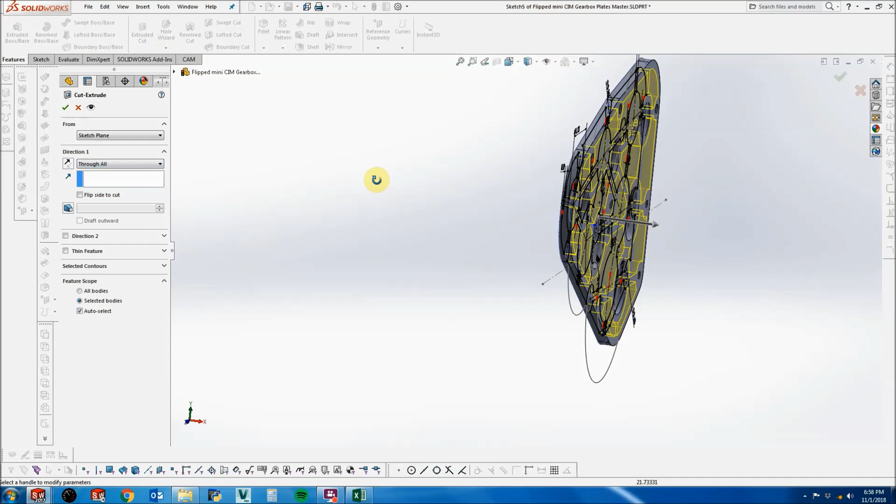There we go. We're going the other direction. That's a good point, though. It would have cut through the other part if it was going that way.

Now we get to do this fillet thing. Like 100 something, we fillet everything. Yeah, we got like 100 things to click on or something.

What's fun is if you just fillet the flat face of it, it does the entire thing. Not edges you want, but also the line. It looks amazing. And we'll see if we run into any issues here.

When you're doing this fillet stuff, it's best to complete it every once in a while to save your progress, because if you mess up, everything just goes. That's a good idea.

Yeah, like that, it's not what I wanted. Looks pretty cool though. Yeah.

So what about that kind of messy area in the middle where it looks like a B? Is there a way to clean that up a little bit? We'll put fillets in there, it'll make it look a little cleaner, but see how there's not enough room for the fillets there? So we'll not put those in just right now.

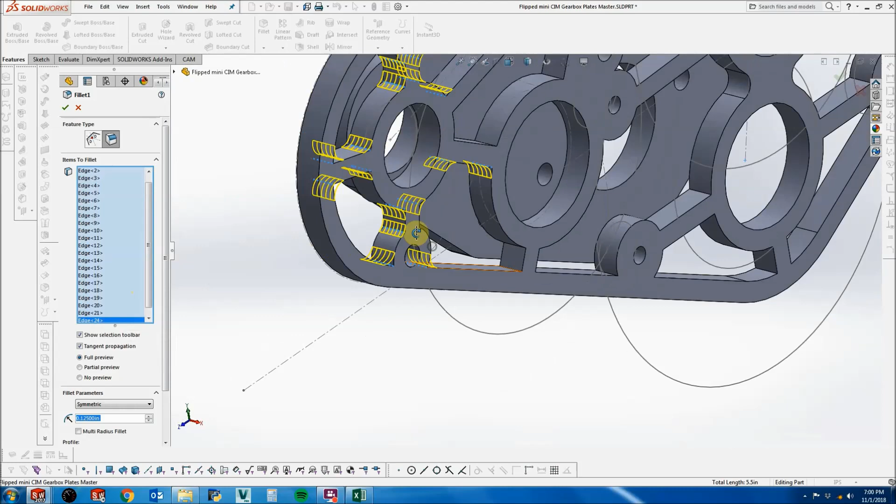So let's see if you put something else in the center of this little deal, for the wood. I kind of think it's not worth it, I don't think it will make that much difference. I just mean aesthetically, wood, it looks...

There we go. It'll look a little nicer once we... Okay, now I clicked on some things I didn't want.

I'm wondering if they're gonna fit in here. Yep. I'm gonna save my progress before clicking on edges. Oops, not what I wanted. Fail.

Oh my gosh, no. Have you ever done like a 2-hour session of this as well for everything? Yeah, I try to save every time I'm switching between parts or something.

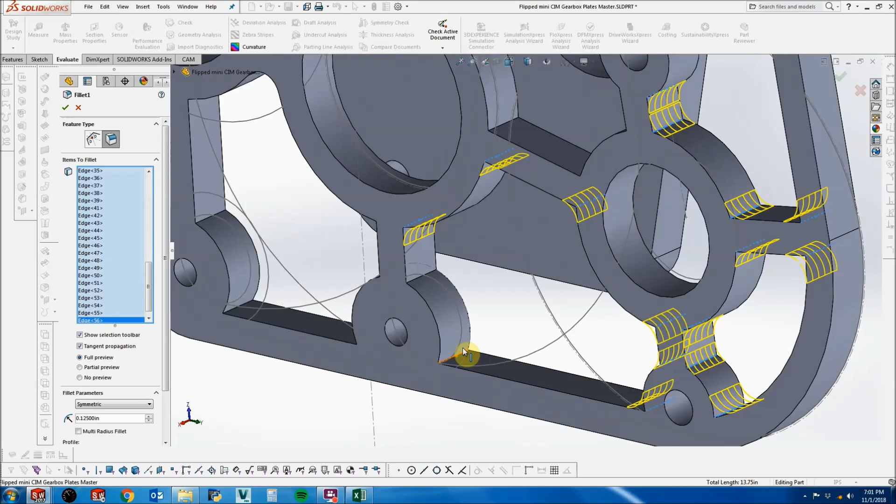Sweet. I guess we could have put in the spacers in our assembly before we started this part of it.

Alright, this may be tight down here. Oh, we're good. What's the radius of the fillet? 1/8 inch.

So it should be bigger than whatever bit you're going to use to machine it, not the same size, but at least a little bit bigger. If you are water jetting though, you can make it smaller potentially, right? Oh yeah, you can make it a lot smaller if you're water jetting, a lot smaller than 1/8 inch. I kind of like to make it not too small though, I think it looks better if it's there a little bit.

Is the fillet to make it just cooler, or is it to make it manufacturable? Oh yeah, because if this is too much of a sharp edge, you can't machine it. Alright, yeah, okay, I forgot, we can't do that one.

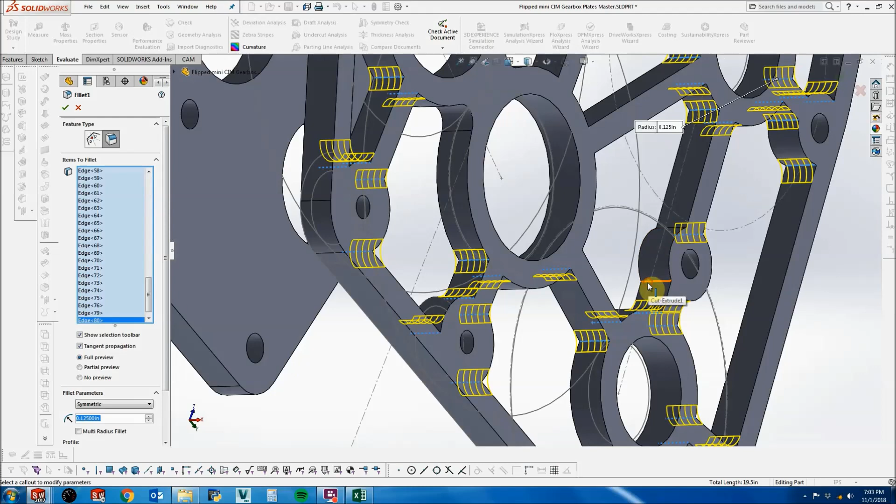So are we gonna make them just with the router? We could make it with the router. Faster with the water jet, right? Yeah. We're definitely... the water jet doesn't take into account time to wait until it gets fabricated. Right, that's true, because we don't have our own water jet, we have to get parts water jet.

Can the router do like 1/4? Yeah. The router, I'm not sure what bit we're gonna use to really get it on there. Should make some things that... probably not.

What happened here? I think we were supposed to have a thing there. Apparently we just never did it.

Still got that. Yep, and now it lost something. Hopefully that's it. Nope. So we're not the one with the too small.

Okay. Did we miss anything? So we had an issue down here.

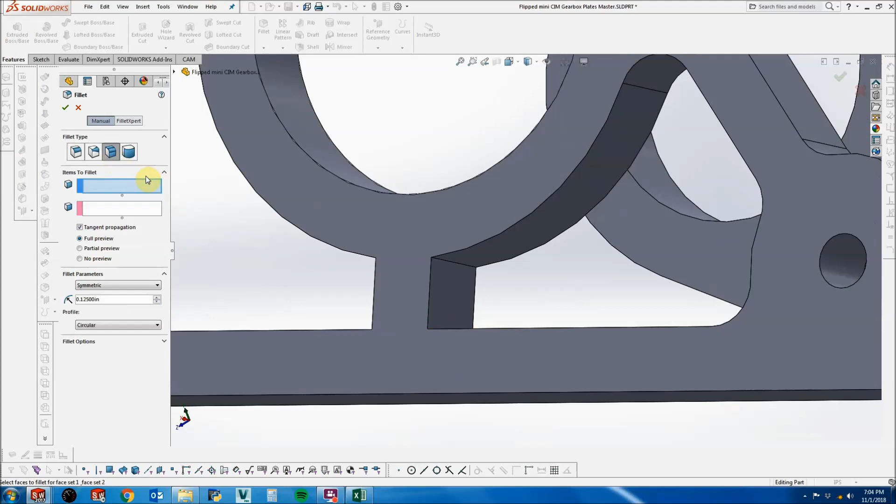So for those guys, you could go add them in the actual sketch, or you can do this, like a face fillet, and it can totally do exactly what you want it to do.

Okay, that's looking pretty good. How is the other one? Let's make this a nicer color.

That's also harder to see, but I think that looks cooler. Okay, thankfully this one will be quicker because it's smaller. For now, we'll just look at it that way. It's easier to see.

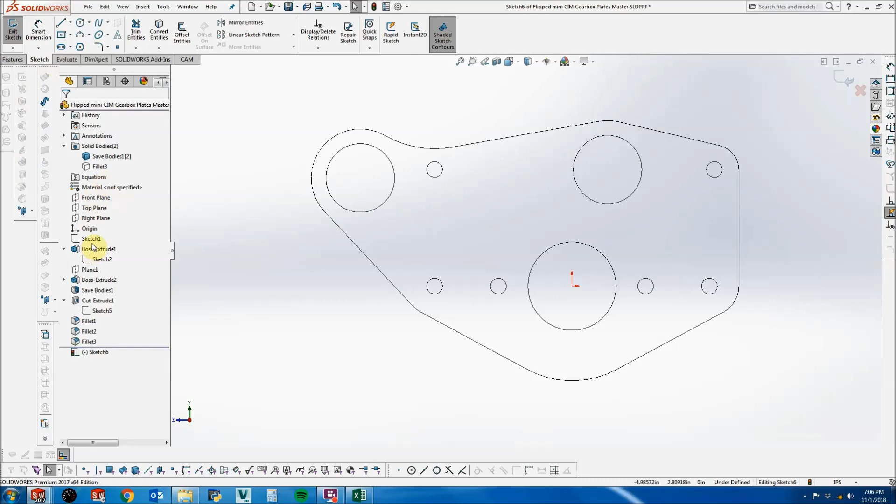Okay, showing that real quick. Same process now. Let's connect. This will connect.

Actually, let's not connect that. For sure one of these. Let's do this. Definitely just straight across that whole thing.

I don't think we had this one in the other plate, but I think this is okay. Let's sort of aim in this general direction. Hit sort of in this area.

I think we actually had that on the other plate, and I think that was 100 degrees, but let's actually reference that so it lines up just right.

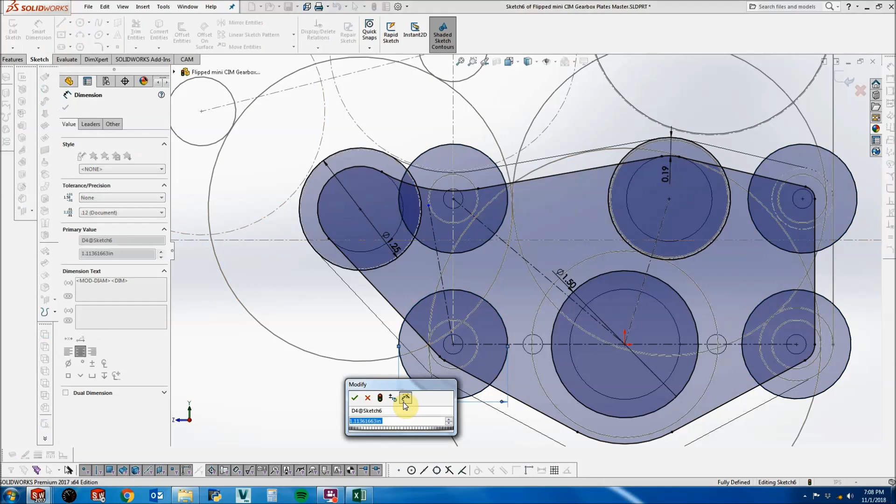Oh, I did just notice one thing. These holes we actually want to not be clearance holes. We want them to be 10-32 tap drill holes.

Alright, back to what we were working on. I don't know why it wants to do that. Yeah, I see that. We don't want that.

Don't really want to use that from sketch 5. Let's go. I'm gonna make it equal to this, and we'll copy and paste that for future use.

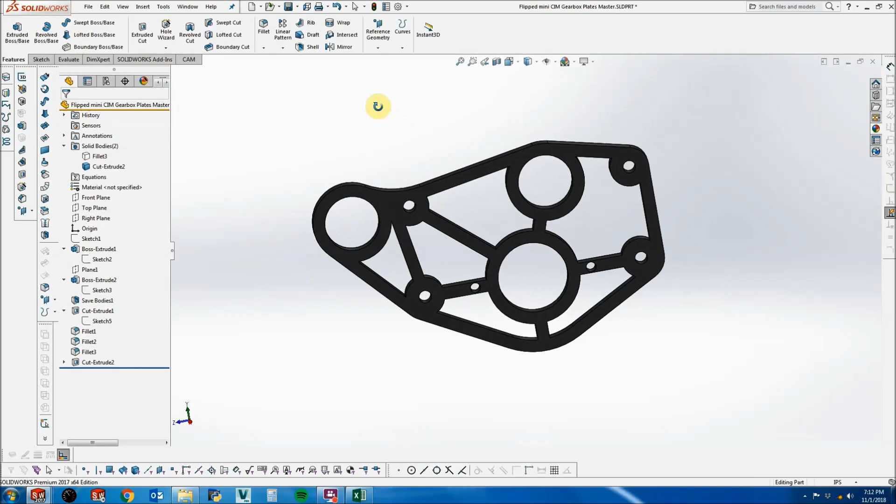Those tap holes for the 10-32. Oh, yeah. Definitely don't want that. Looks pretty thin.

Trim the wrong thing. Ooh, sometimes these are hard to click on. Jeez.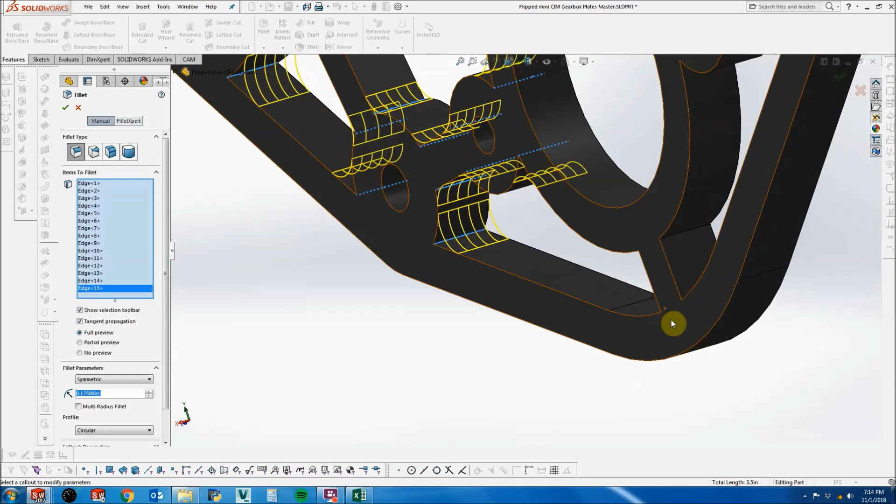And let's see how this... Nope. You gotta fillet the two surfaces. Yeah.

What's the downside of filleting two surfaces? It's just another feature, I guess. Not really a downside, I mean. If you can only do one fillet per feature, it'd make it like a bunch of features if you did it for all of them. That looks pretty nice.

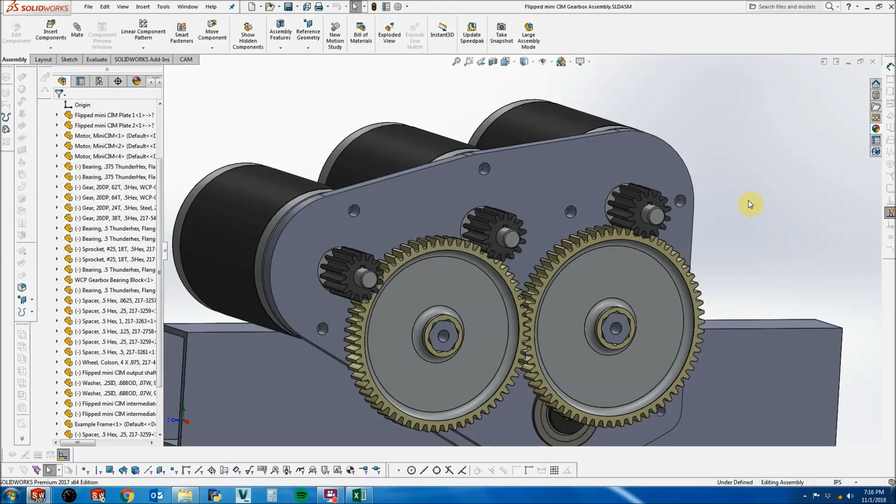Rebuild, you can save it. What? Didn't I save? Oh, I think I know what happens - I need to go back to my master part, and I probably need to move the save bodies below all that other stuff.

There we go. That's looking pretty sweet. And let's put in our spacers, which I think... is that it?

After you put the spacers in? No, but it's just other little stuff. Yeah, I got the right ones already.

What's the distance between the two? Let's do inch and a half.

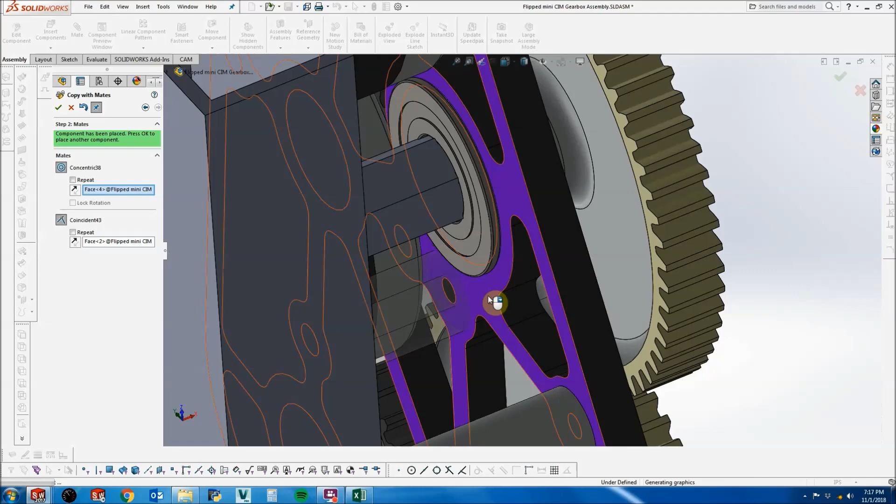One more spacer. It's pretty close to that motor, but it should be good. So let's check that, just double check. Cool.

Okay, let's put in those washers. We already put it down here. It's not going to be that much room for a screw head there.

We should be able to do the copy with mates thing. Yep.

Those are gonna get tapped, right? Yep.

Well, you could make your own, but we'd probably be lazy and just order them from McMaster-Carr, from whatever distance you want. Yeah, like in 1/8 inch increments. They come in 16th inch increments below 1 inch, and after 1 inch, 1/8 inch.

Yeah, let's use these. We'll use those screws too. No, actually, I don't want those screws. Let's use...

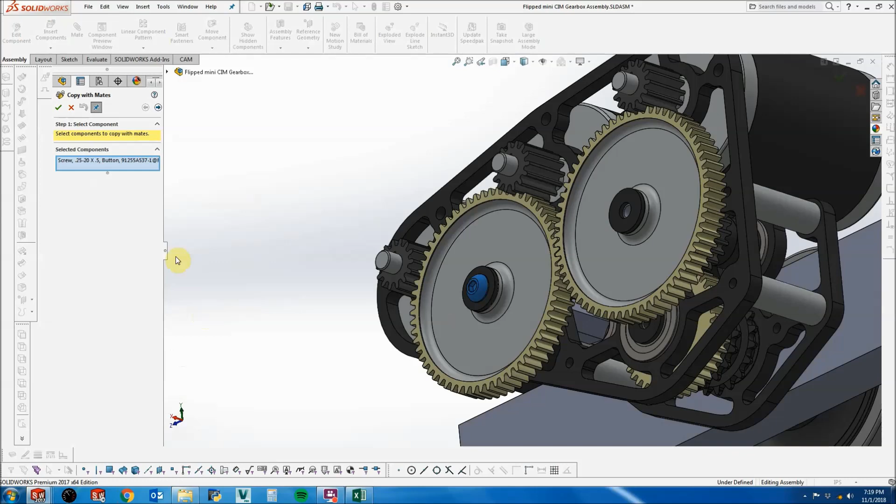Anything there? So I did a copy with mates, yeah, and it's allowing me - it's like, we'll do it again for these motor screws, and I'll go slower. So those are gonna be 10-32. It's like a helpful tool. Yeah, it's helpful if you're placing a bunch of the same parts.

Okay, so I'm going to copy with mates. So it's like, is that the component you want? Yes, it is. Alright, so it knows I did a coincident and then a concentric. So I want this one to be coincident to that surface, and concentric to this one.

Let's get this hidden one. So after you put one part in that's coincident and concentric to a surface, then you can just repeat it. And it's not always coincident and concentric, it's just whatever the thing you're copying already has on it.

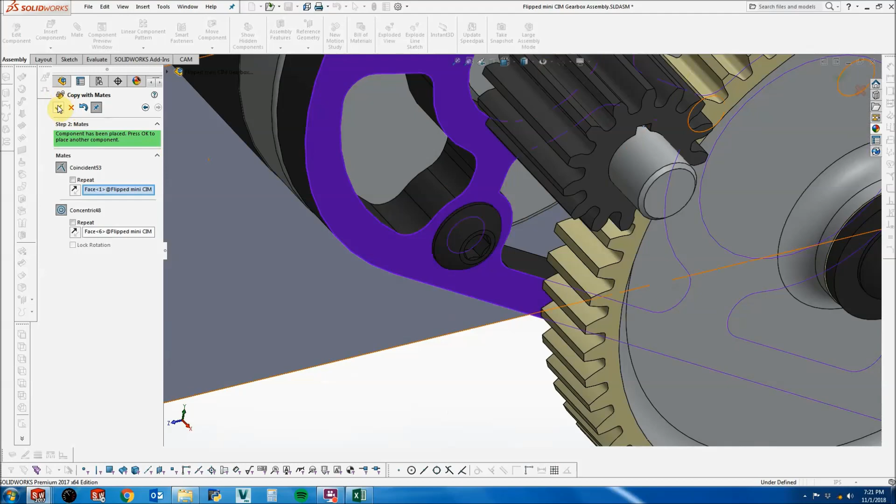There we go. Okay, let's put in our screws. This 2-inch one? Is that gear directly connected to the CIM motor going to stay on like that? No, we still need to put the retaining ring things on.

I don't know why, but I like to select the face, not the edge. Concentric.

Okay, so this is actually, we're editing this part in context, and we're going to make these holes big enough so we can fit the screw head, and we can put the screw in. We should probably put a washer between the 2x1 and the screw head, right?

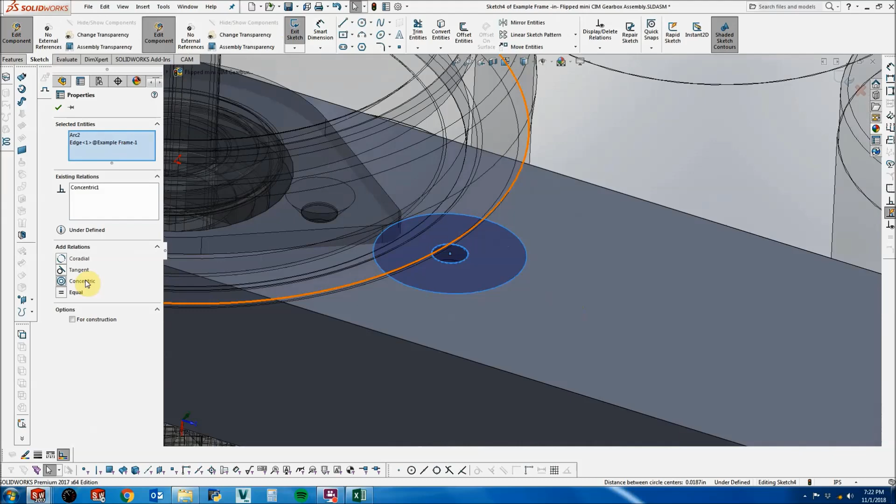Maybe, just because the screw head's not very big. And this is a surface that we're mounting to, so we don't want it to wobble at all. So that's true. I think it might be okay.

Alright, so 2 1/4 is the next size up. Ooh, so close. Oh, scoot it all the way. Got it.

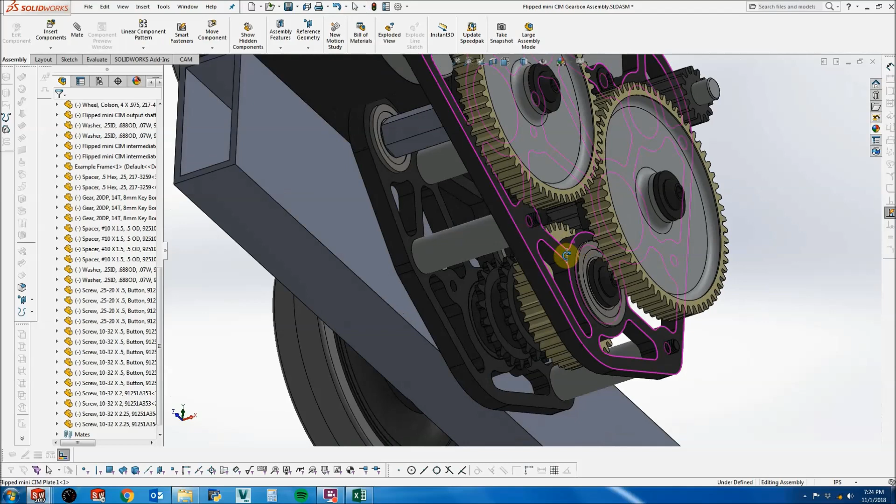Okay, well, they stick out a little bit, but if we put a washer in there, they won't stick out too much. Yeah, that's true. Seems annoying to get the washer in though, I guess we make these holes bigger. Yeah, to make those bigger, put like a slot on the top.

Okay, let's put on those retaining ring things. Where are those? Probably here. Yep. You're going to put one of those on the front and the back? That's right, okay.

Could you have the gear more towards the mini CIM and then cut down the shaft so it doesn't protrude so much? I think our limiting factor is this is kind of close, but this gear is extra long, so you could. No, not necessarily that, but it sticks past the edge of the gear. Yeah, I mean, you could just make it as short as possible.

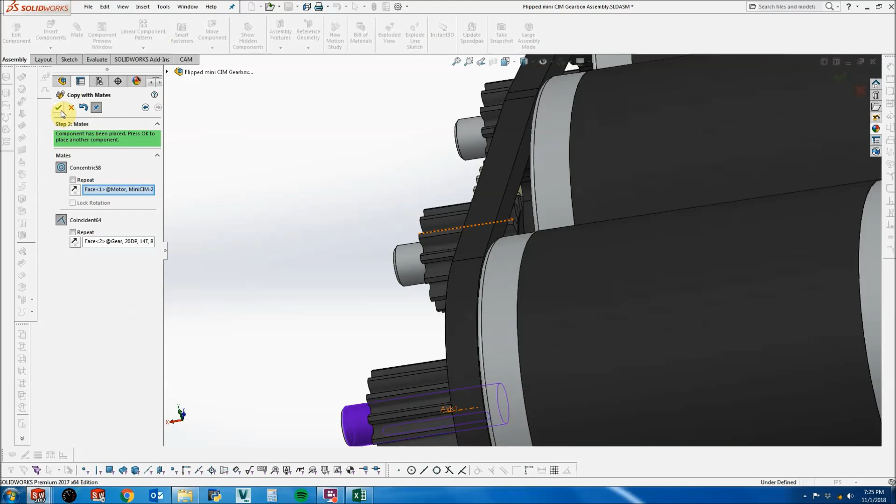I don't know if it's worth it. I don't know if you want stuff that close to that anyways. I mean, don't even move the big gears, just move the pinions closer to the mini CIM, and then cut down the shaft on the mini CIM. But that might be a dangerous thing.

Okay. Jeez, what's going on here? That's way out there now.

Okay, what happened to this screw? I think you missed, I think you put it in the other side. Oh. Put it in the hole for the spacer. Okay.

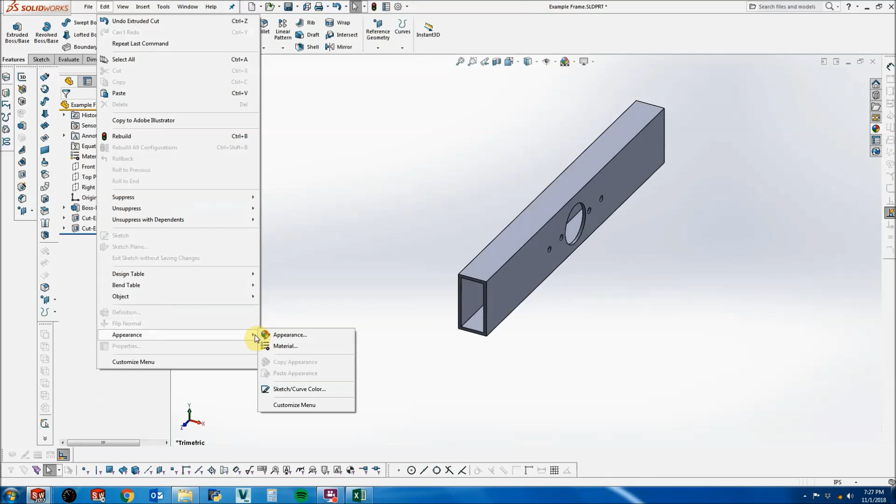Looks pretty good, let's just make this aluminum colored. Something you have to worry about is the spacer running into the chain. It looks like you spaced it properly, but... Oh, these spacers? Yeah. In this stuff? Yeah, I think we're clear. That is something, and the motor's pretty close to it too. I think we're clear though. You can tell that we are, but it's definitely something you want to make sure of pretty early in the process.

I guess we should put in these screws. I think I predicted we would need those ones also. Let's see if this is going to work. Yes.

Oh, I don't know why they're not just... That looks okay. Looks like they don't quite fit perfectly.

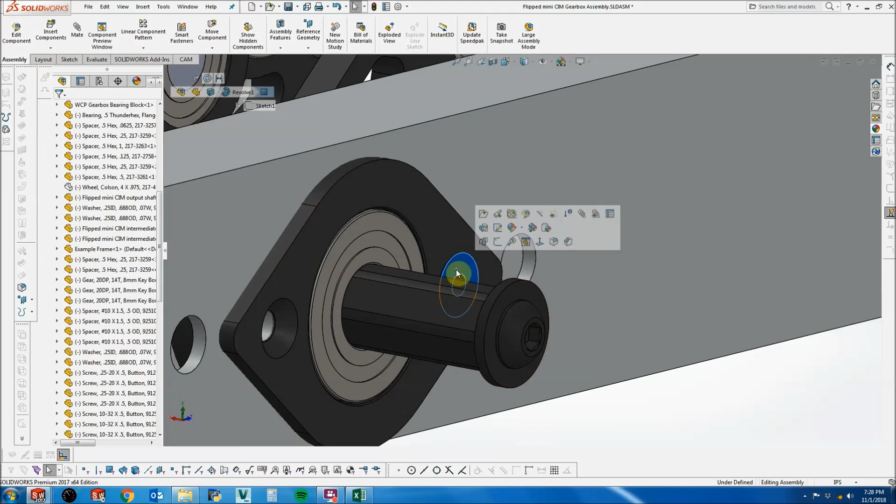Okay, and then another thing, so I think we're pretty much done, but let's add some stuff to folders and clean this up here. So like example parts.

Let's put our wheel in there too. Got a lot of hardware. Can you combine all of that as like one part? All the hardware? I mean, I guess I don't think it's probably a good idea. It's not good, but I'm just asking theoretically, because there are times where you should do that maybe.

Well, if it's all one part, it's all going to move together. So if you want to... actually, never mind, that was not a good question.

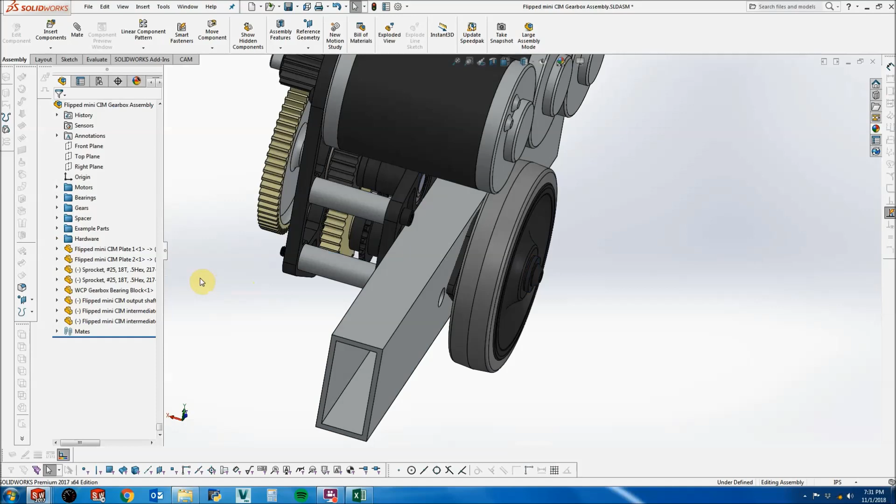Okay, so that's pretty decent, we made our assembly not as crazy. Then you can also do interesting things like just show the hardware or something like that.

Alright, 2 shots, okay, it looks pretty nice, I think. So yeah, so what's not CAD'd on this? The 3 shafts and the plates, so there's 5 custom parts and the rest is CAD'd. It's pretty nice, and those shafts were pretty easy to make on the lathe. Alright, cool.